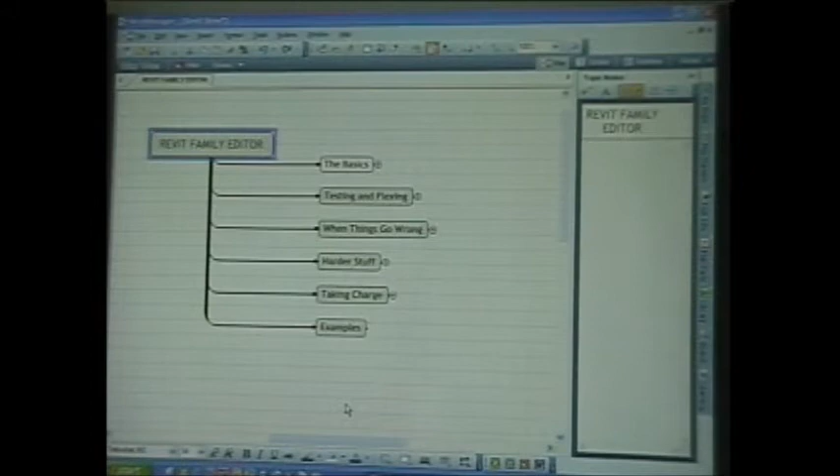So the Revit Family Editor, a bit mysterious device built inside Revit. There isn't a separate interface. When we call it the Family Editor, it's really the same thing, same application. It's just when you start building content, it ends up showing you a slightly different face. Very slightly different. Just a few different tools. Fewer tools are offered to you. So what I've done over time now is I've been breaking down things into different ideas of information, okay? So I've got this thing broken down into different portions of stuff.

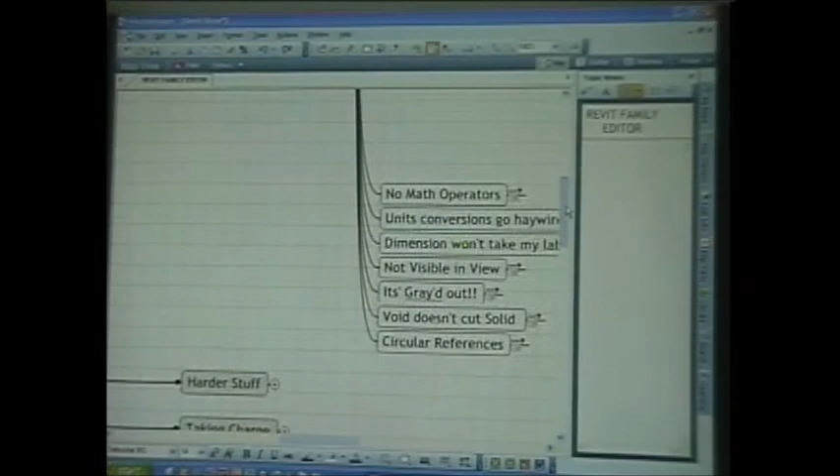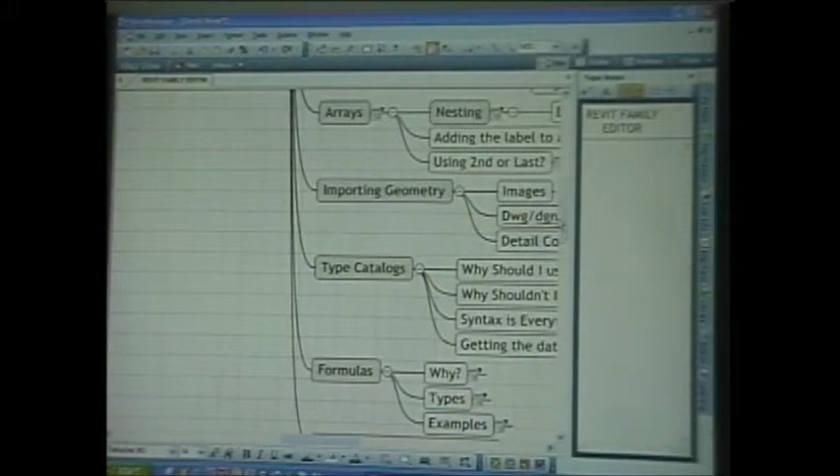So I have the basics, testing and flexing objects, when things go wrong, because eventually they do, or very often they do when you're making stuff. So different kinds of things that go wrong that we can talk about. Harder stuff, like nesting objects, rotating or angling stuff, arrays, importing geometry. There's no way we can cover all this in, what do I have, 4 hours? Yeah. You guys can stay late, that's permission.

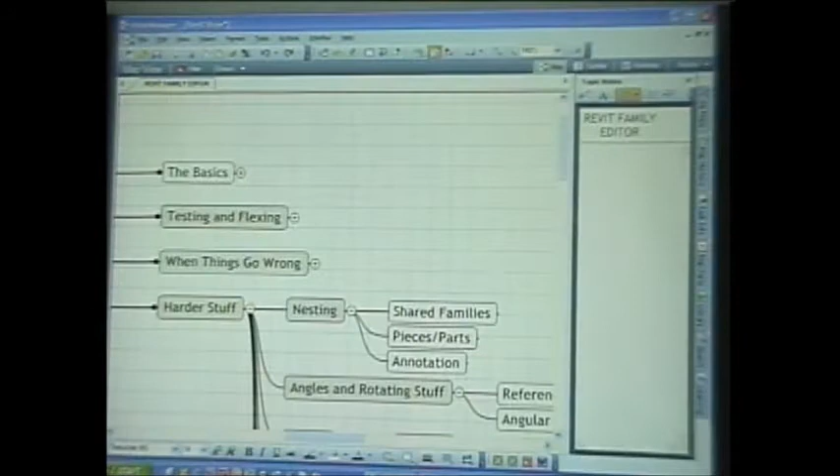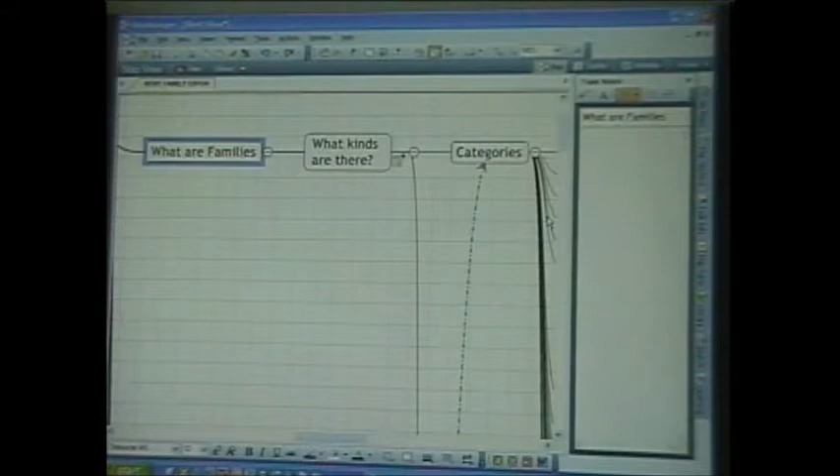And then finally taking charge, using templates, creating your own versions of templates, some other kinds of things so that you can make it a little quicker. The next time you have to build a door family, you can just start out, get going. So one of the things I like to do, now some of you have built content, some of you haven't. I don't want to be too mysterious here. So what are families? We asked that question. Doesn't even know what content is. Families in general are the building blocks of your project. So doors, windows, walls, all that kind of stuff. The kind of content that I'm talking about is the content that you build apart from the project itself. So not walls, not floors, not roofs. I'm talking about doors, windows, furniture, parametric objects.

How many of you are actually using 9.1 right now? How many are stuck in 9 or 8.1? Wait a minute. Oh, you're in 9. All right, so let's take a quick look at a piece of content. I'm going to open up an existing stock piece of content that ships with Revit. I'm using the Imperial Library because I'm American. I only learned metric a year and a half ago. So let's start off with a door. I'll grab a single flush door. It's the simplest and plainest of all doors in Revit.

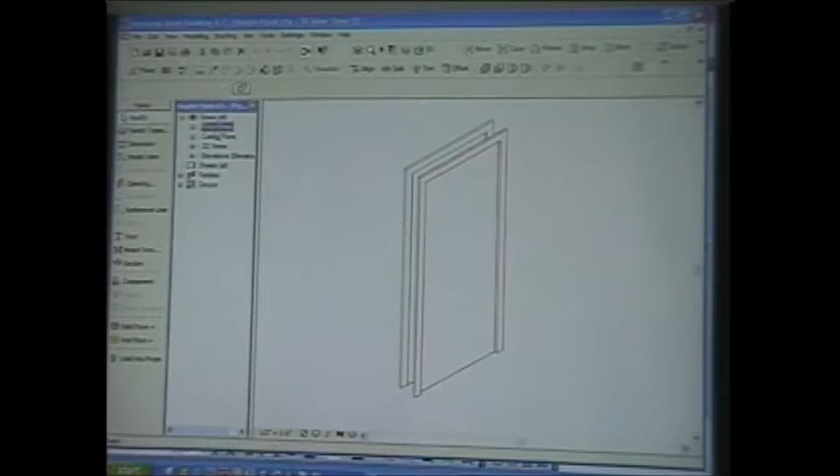So we have an object in here that represents a panel. We have an object that represents trim. Another piece of trim. We have a plan representation of the object, which involves an arc and a series of lines that represent this panel in plan. So notice while we have the line work in plan here, we have a plan representation of this panel, this 3D object. Well, it just so happens that this 3D object doesn't appear in the project environment at all, because we have additional control that says, well, I don't want to see that. So there's a great deal of depth, despite the fact that this looks like a rather simple interface. So that's a door.

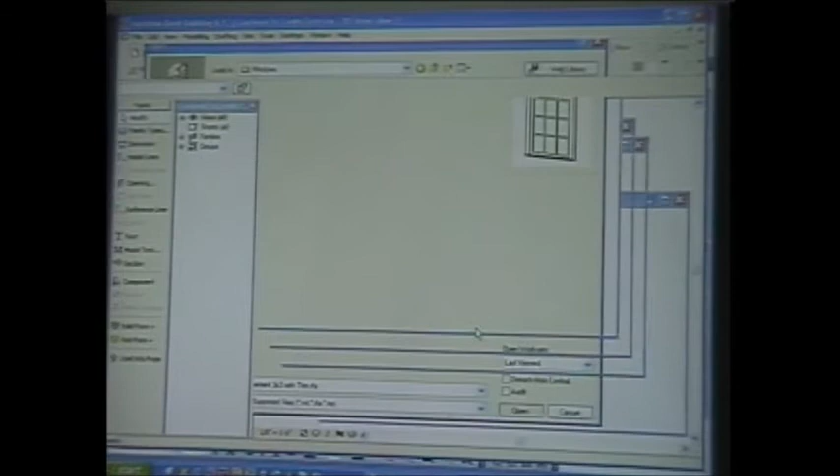Let's take a look at a window. So again, we've got different elements here. How many people model in 3D solids and so forth in AutoCAD? Doing design and so forth? Okay. Not many of you. So these are solids. So if you're familiar with AutoCAD solids, it's very similar. It's an extrusion of a shape.

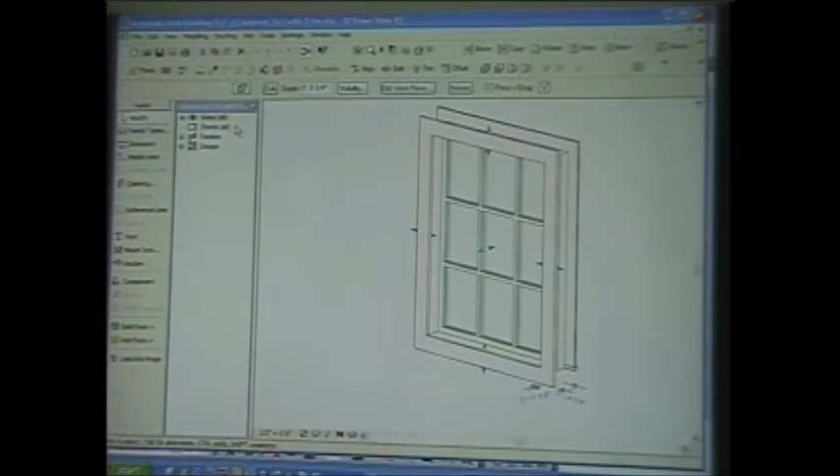So again, in plan view, we have all these confusing dimensions and parameters, width 3.0, all that kind of stuff. On the elevation, you can see the solid object here and all these reference planes and so forth.

Anybody seriously confused yet? Everybody? Except for like 4 people? Okay.

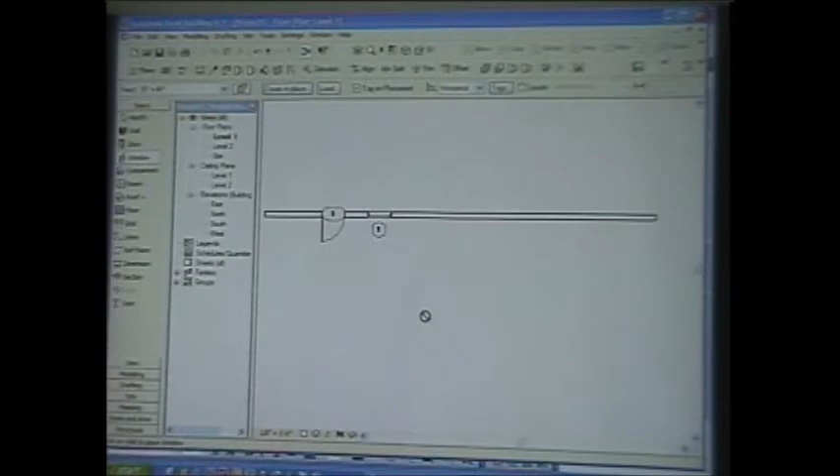So what does this stuff look like when it's in the project environment? Well, those of you who are using Revit regularly now already know, but for those of you who aren't: when you place a door in the wall or a window in the wall, you get the plan representation. You get the south elevation representation, and you get the 3D view of the object.

So what does it take to go ahead and build one of these from scratch? Those of you who are building content regularly, what's the top question on your mind tonight? What's the thing that's bugging you the most right now? Anybody can speak up. Maybe it's not important enough.

I just thought off the top of my head is how to flip, you know, the control. I just started using it. So, you know, how do you know how to flip something? What plane does it flip on? What does it use as an axis to flip the object?

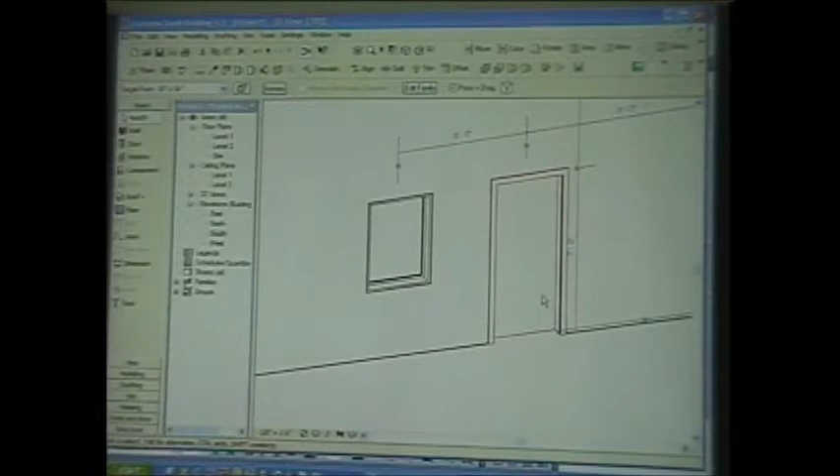Okay. So what he's asking about is this notion of being able to flip an object. Now, in this case, it's using the wall, the host itself, to flip that. And when I flip this, it's using the origin or the center line of the object. So if we take a look at this family up close, like we were a moment ago, these are what Revit calls a control. So there's a control working over here.

So that control, when you're using it, is essentially a rotation function, where when you click it, instead of mirroring the object, it rotates it around. And I think the only place I've ever found a use for that is where I have a handed piece of furniture that only comes right-handed, so a desk and a typing return. If you mirror it over, you're making something the company doesn't make. So if you need it to flip, you really need it to rotate around instead of mirroring.

So, did that just mystify anybody? Does everybody here use AutoCAD at least? Yeah. All right, so if I say mirror, I'm not talking to a blank stare. It happens. I've got 3 people in class right now that never use AutoCAD. So when I try to throw out a metaphor, well, it's like this in AutoCAD, they just, yeah.

So that's the control object that you're asking about. Does that answer your question? Well, actually, I thought that if you hit the control on the upper left, right there, it flips the door down, right? That one flips from one side of the wall back to the other side. Right. And this one flips the hand of the door, right? So it flips it about the reference plane. This one flips it based on the host.

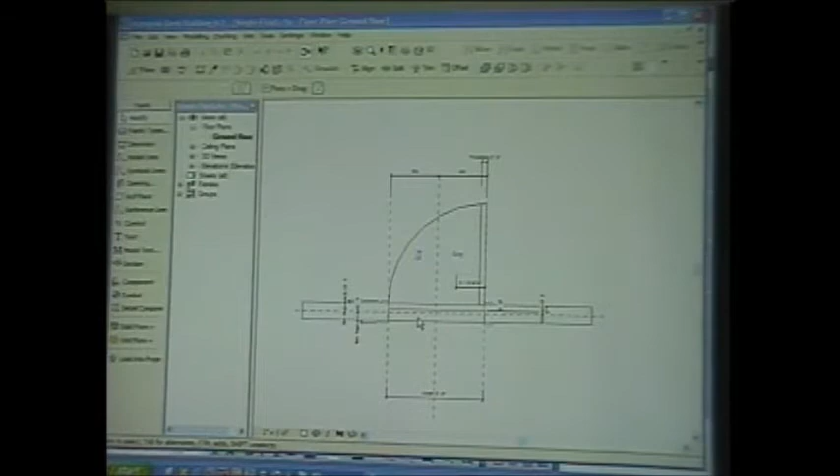Now, if the door has an inset, it's still going to flip it over based on the center line of that wall, but based on whatever inset you might have dialed into the door itself. Other question? I was just saying that was a good question. Oh, okay. Any other questions like that? And I can just knock off right out of the way?

Yeah. The green lines represent constraints, center lines. That one here obviously is a center line, but the other ones are constraints that the door is held to, the size in this case. What he's referring to here inside the family editor is something called a reference plane. And this reference plane is merely a construction line. The thing setting this apart from everything else is that it's constrained with a dimension and what Revit calls a parameter or label.

So if we look up at label here, it says width. So this dimension has had a parameter associated with it defined as width. So if I change the width of this door via family types, and I say that this thing is going to use a different width.

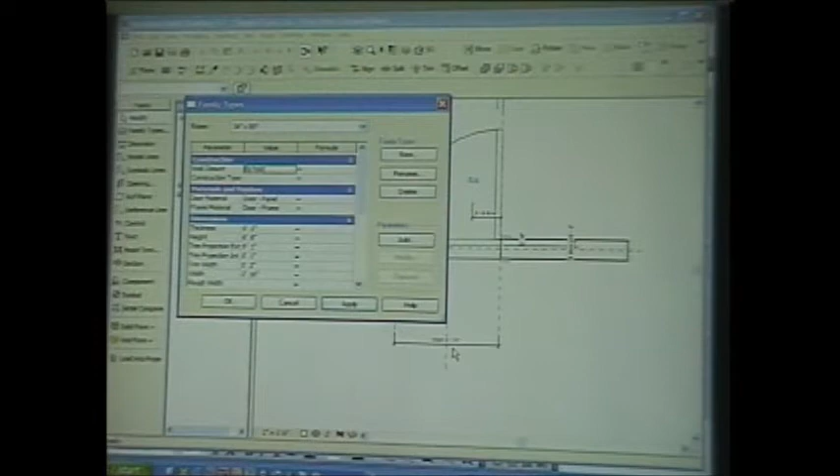Now in this case I've got some types, so I can just choose a different width. When I apply it, we'll find that it shrinks here accordingly. And the beauty of using construction lines is that this solid object can be aligned and locked to that reference plane. So just a couple of construction lines per se can lay out the rules for this door.

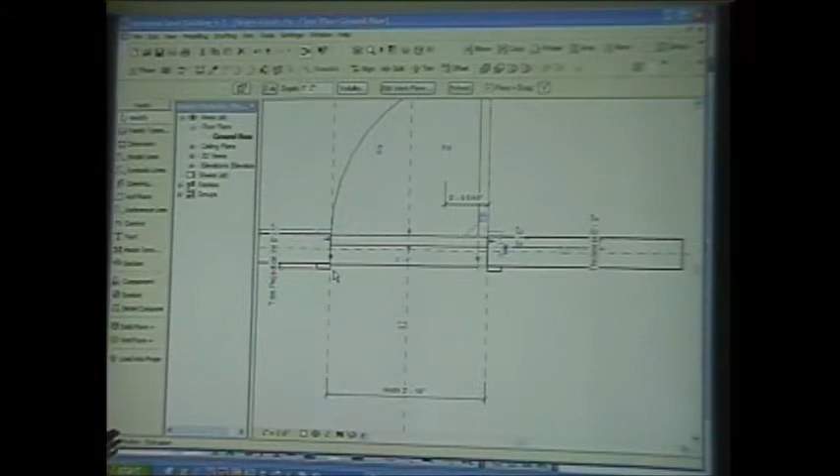And then a solid can attach to it, a line can attach to it. All this other related stuff can associate with a single object and a single parameter. So all these different sort of related things change at one time while I've only had to sketch one reference object.

I'm trying to get the parameters to act in concert. For example, I'm trying to put on window grills, or door grills, and glass door, French door, and... You're trying to do arrays? You're trying to array mullions? Yeah, basically. And so when I designed this door, this family of doors, regardless of the size, the grills will move incrementally so that they're all uniform in size. I can't seem to understand how I can make the parameters, or constraints maybe, with parameters work in concert. All right, well, I'll talk about that in a second.

Any other questions like that? I can just pick off. Yeah. I also have the same problem that he's having, but also keeping the parameters straight in the schedules. We're trying to make light fixtures, for example, just two-dimensional symbols for them. Because the Revit library only gives three-dimensional lights, which we don't really need in our office right now, just going through symbols. So we're trying to make various light symbols for light fixtures and keep them being counted in the various schedules, and we're not able to set that up.

Okay. So you're talking about trying to manage information, and you're trying to decide whether to put the information in the family or just in the project itself. Or did you know that there's a difference? We want to bring them into the project. Right. Because after we do it, load it into the project, then the project will be able to count the new symbols that we're making in the existing schedules. Okay. All right. So arrays, parameters, schedules.

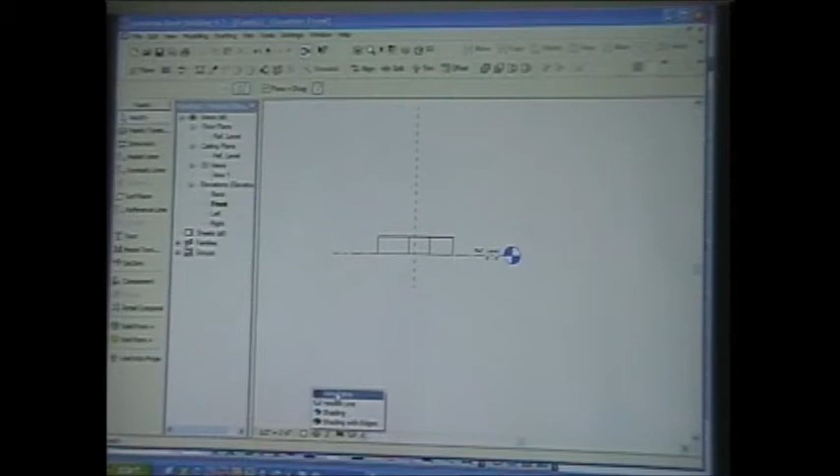How do I know that? Well, I've done this a bunch, so I'll just sketch something real quick. I'll put a block here, and I'll put another block behind it so I can't see it. And then I'll go to the front elevation. It's using wireframe, so I can see everything. So if I use hidden line, look at that. The big one's hiding the little one. So front must be down here, right? Make sense? So every template is like that.

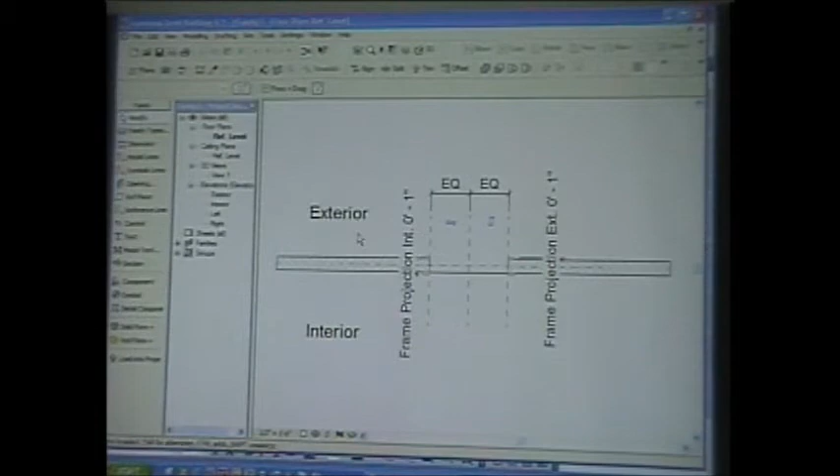However, if you start off a door family, new door, and you look at this template, a little more information: Exterior. Now how many of you think of exterior as the front when you're thinking in terms of designing a door? To be honest, I do. I always thought this was the front because this always said exterior in the door families. And one of the first families you'll build besides a title block in Revit is probably your own door. So I thought this was the front for ages.

But this is really front. So if you look at this reference plane, it says right, okay? And this one says left. And this one says center, left, right. So I go to what I think is front, exterior, and I click on this one, which should be right. Oh, wait a minute, that's left.

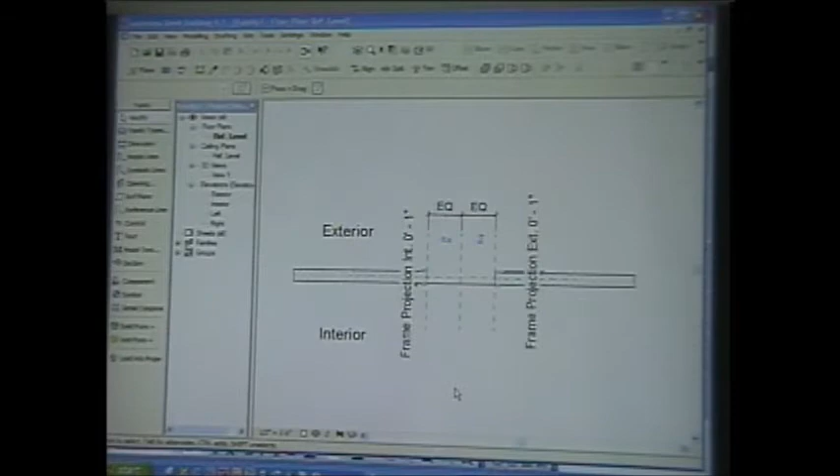So I go to interior, and I pick on the right one. Oh, that's right. So by process of elimination, this must be front, okay, based on the orientation of these guys. Now that everyone's got that straight, perfect.

Steve? Yes. I found that in some families where it says placement side and back, it tends to be reversed. And I'm speaking on Revit 9, I haven't checked it out in 9.1, so they could change that. You might be referring to profiles, because that placement side is in there for that. Oh, a wall-based. A wall-based casework might say that, yeah.

The other kind of strange thing is if you go to a 3D view, Revit always seems to be looking at the back of the wall. So I've seen instances where people model a bunch of stuff on the front of the wall and go to 3D view and it's not there. Oh my God, where's my stuff. Then they spin the view around. Oh, there it is, thank God.

So anyway, in the generic model, at the very basic, the lowest of all lowest levels, we have this reference plane here, which is called center left right. Now the fundamental practice in Revit is to lay out construction lines, add dimensions, position them where the extents of your geometry are, add dimensions and add parameters to those dimensions so that you can get the construction lines flexing the way you want, and then you add the solids or voids that you need to create the form that you're looking for, or you draw a symbolic line over the subject.

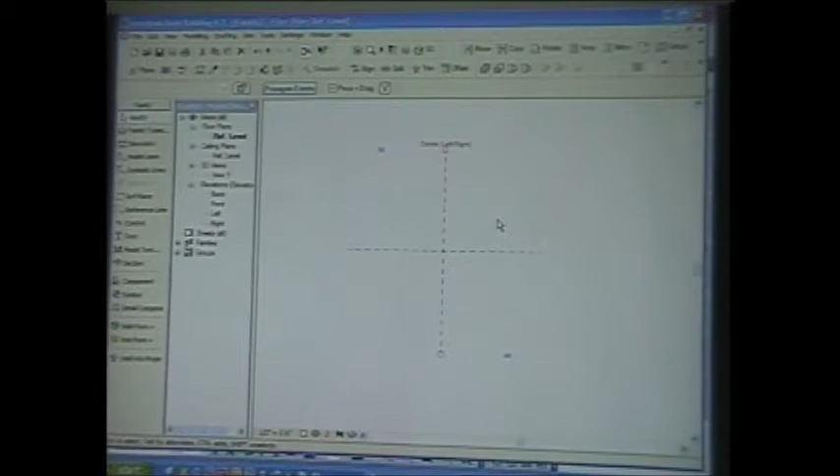So the function here is we're going to use a reference plane to define the center of our object. And that leads to another thing of consistency. If I want doors to swap out and change so that they flex from the center out equally, then I have to build that kind of decision in. And if I want them to grow from the right to the left at all times, then I have to design that in as well. So I have to be careful how I constrain things with dimensions and or locking and so forth.

So this reference plane is named. The naming function is important too, because if I've named it, then I can build objects using that reference plane, because this reference plane actually defines a work plane, or can define a work plane. To prove that, I'm going to go to a front elevation, and I'm going to draw a reference plane at a weird angle.

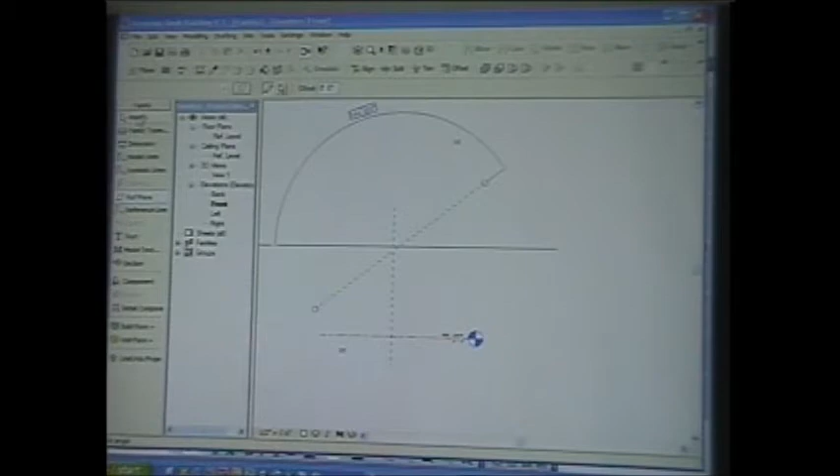And then I'm going to go to 3D, and I'm going to try to change my work plane to that reference plane. Look at that, it doesn't see it at all. Okay, so that didn't work. Go back to front, and then I pick this and go to properties instead. Keep looking up there, Mr. Ryan. Angled plane. Now that it has a nice pretty name, go back to 3D.

Change my work plane, turn on my work grid. So my work grid currently is the reference level, or that default level in the family template here. If I go in now, because I named it, notice angled plane is my option. And watch what happens to this grid. The grid has changed its orientation according to the angle of that particular reference plane. So the reference planes define work planes, or potentially they can.

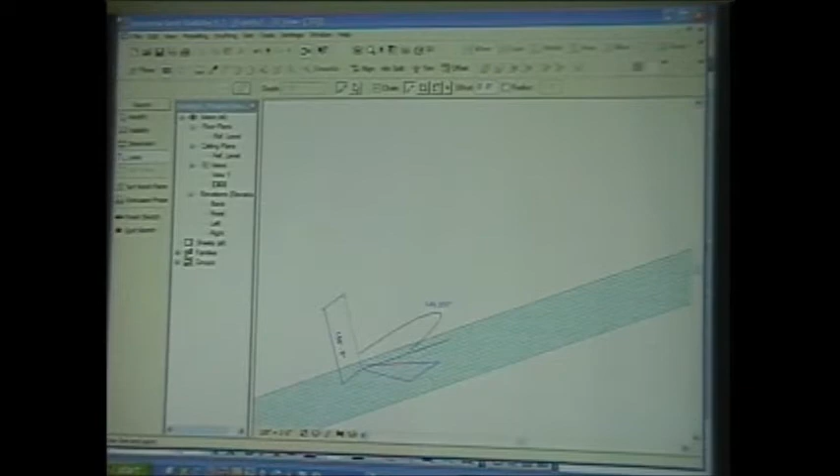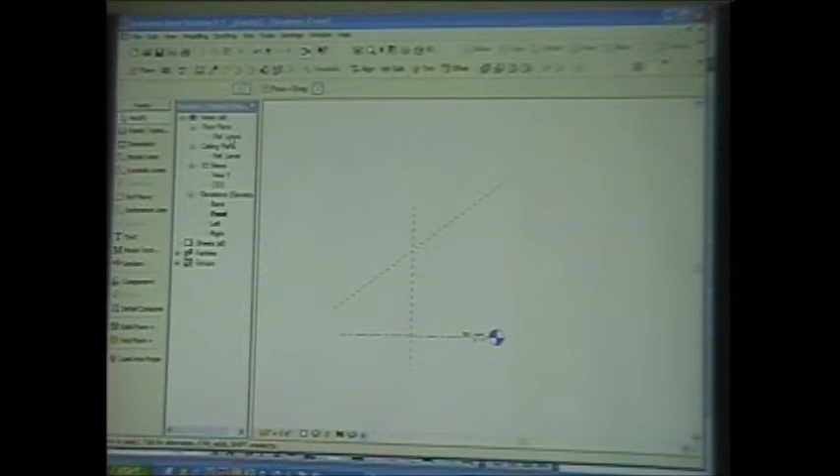So if I build an object on that work plane now, create solid extrusion, I just don't remember. So there's the object on that work plane. Go to front. Must be behind it. Miles away from reality. It's down there. Where are you? There you are. Way off in space. On that work plane, however, right? So it's restrained to that.

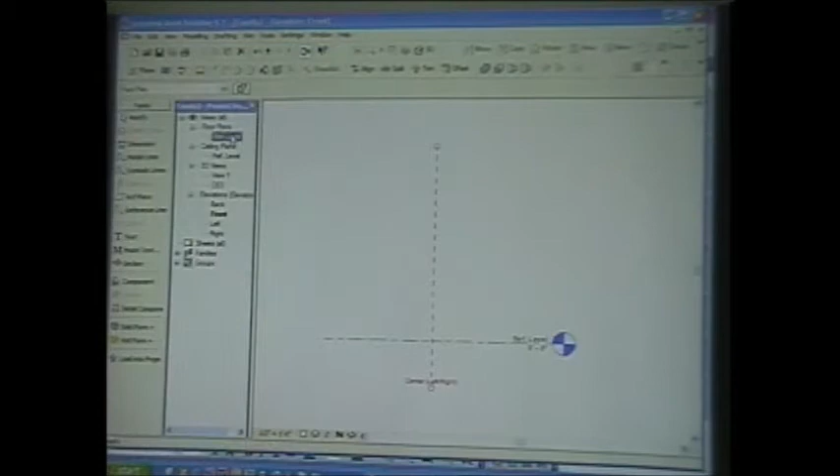So if this reference plane were to change, so too should the object that's based on it ultimately. So now it's changed its angle relative to reality as well. So work planes are very, very important. The reference planes define potential work planes for us. So if I name this one, I can build geometry on it. If I name the one in plan, center, front, back, then I can build geometry on it.

So if I'm building glass from the front elevation, and I want to sketch a plate of glass, and I want it to be on center, front, back, and I want it to be equally spaced on either side of that reference plane, I just create a sketch, tell it to be one dimension or the other relative to it. Set my work plane, center, front, back is what I've got. So I've got a big chunky piece of glass here, right, theoretically.

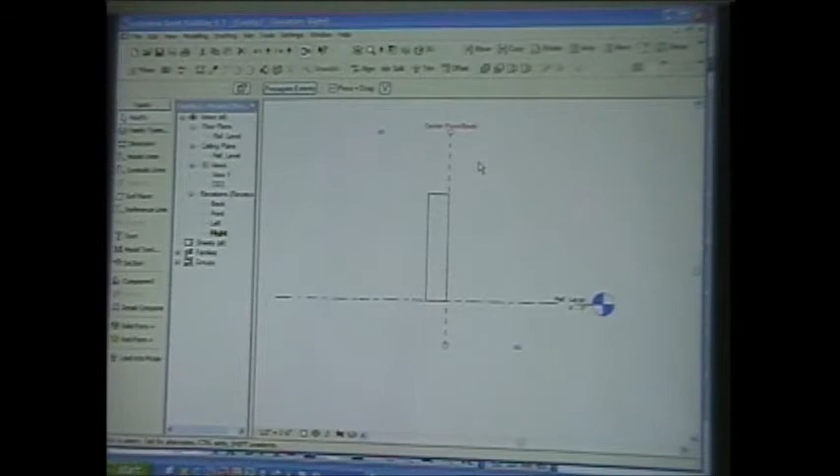So this is the work plane that it's built on, right? If this work plane moves, so does the object. So if I set up a parameter to move this reference plane back and forth, then the object will move with it accordingly, so I can get control out of the object pretty easily. Yes? These work planes also come in to help you define where dimensions go? Exactly. Yeah.

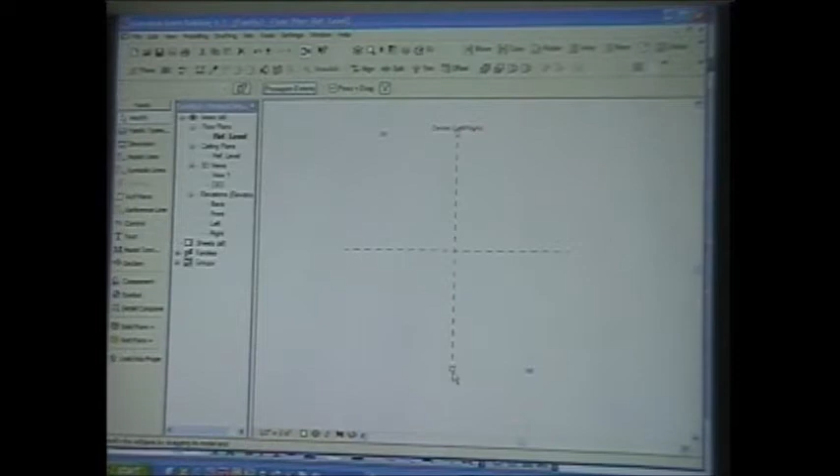So let's set up a little box here. I'm going to copy this reference plane 2 feet to the left, mirror it to the right, copy this one 2 feet, mirror it down below. Now, I haven't named any of those. Just got these guys so far, right? I'm just going to add a model line, which is, anybody know what the difference between model lines are?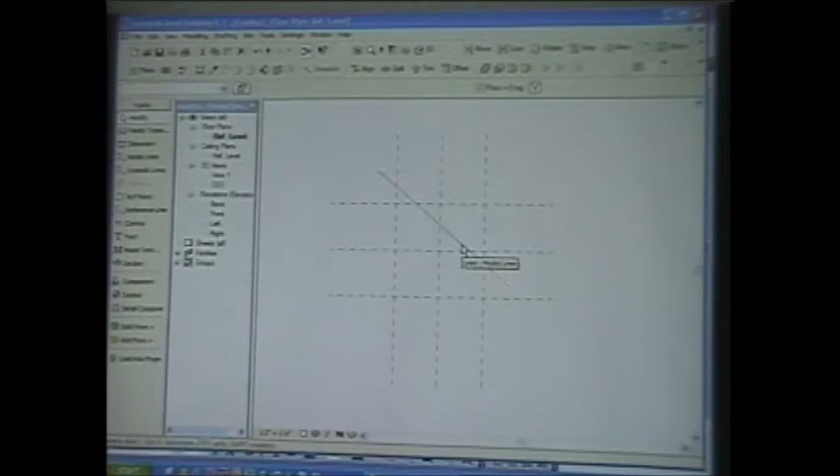No? In the project environment, you have model lines and you have detail lines. In the family editor environment, you have a model line and a symbolic line. So model lines are visible in all views. So I go to 3D, there's my line, right? If I draw the same line using symbolic lines, I go to 3D, no line. So symbolic lines are intended for view-specific applications, plan only, elevation only, side view only. Only the views that are parallel to the symbolic line that I draw is where it will be seen.

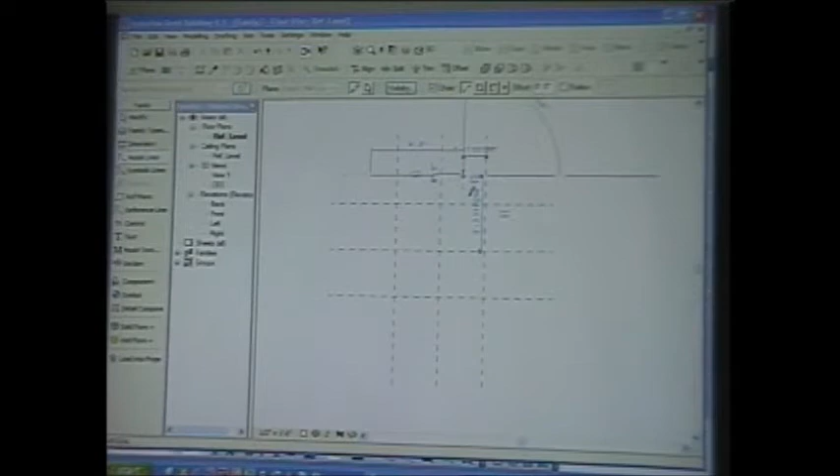So just for the sake of argument, I'm just going to draw a model line off to the left here and above. Excuse me. There's some little secret glue or magic going on inside Revit that doesn't expose itself to most people until you get into this quite a while. And it's one of the things I like to show really early on. When you draw objects and then you place them in the project, Revit just seems to know how to keep them in the same spot. They don't wander around or do anything strange.

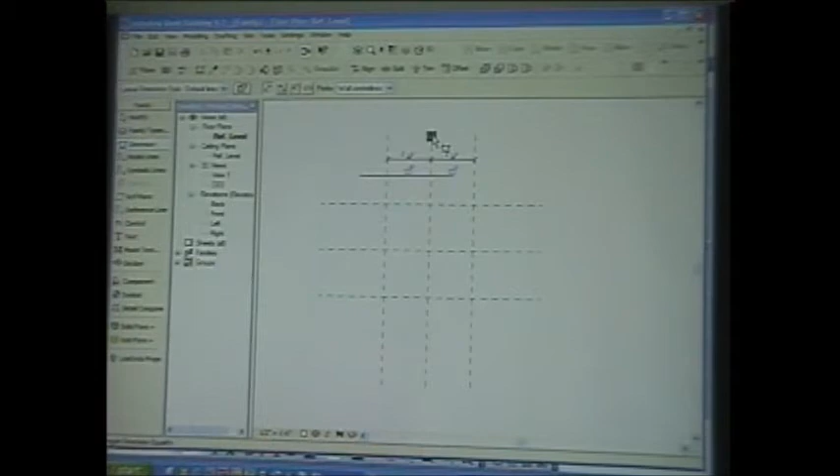And that's because there's something called automatic sketch dimensions. And it's off by default. And I turn them on, no change, nothing exciting yet. However, as soon as I start adding dimensions and constraints to my family, and I click EQ, watch what happens. You see these other dimensions suddenly appear? As soon as I got specific and said I want these reference planes to always stay equally spaced, so if I move this one apart, they should maintain that equal spacing, right?

As soon as I did that, Revit added this dimension, it added this dimension, and it added this one. And it needed to in order to keep this endpoint exactly there, this endpoint exactly there, and to keep this a certain distance from that reference plane there. So unless I add more dimensions to this family, Revit's going to maintain those for me. I can't even delete them. So I pick them and delete them, trying to get rid of them. They're there.

The reason most people don't see them is because in every view in the template, they're off. So you put this in a project, you change the equal spacing of such or other, you change its width. In the project, that line always stays put. I don't know how it manages to know how to do that. It's the automatic sketch dimension. So to take that to the next step here, I'll delete this.

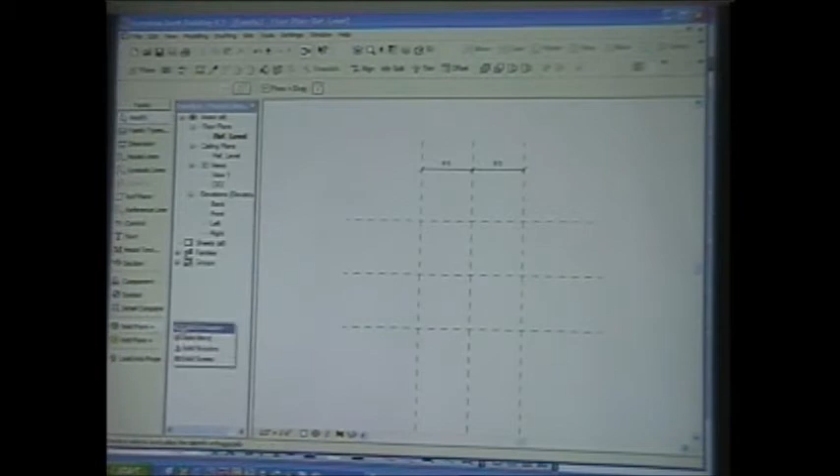I'm going to add a solid form. I'm going to park it on these reference planes. Notice these lock symbols. When you build solid objects and you have the construction lines in place, I can lock in a relationship so that if those construction lines move, so too will the solid object.

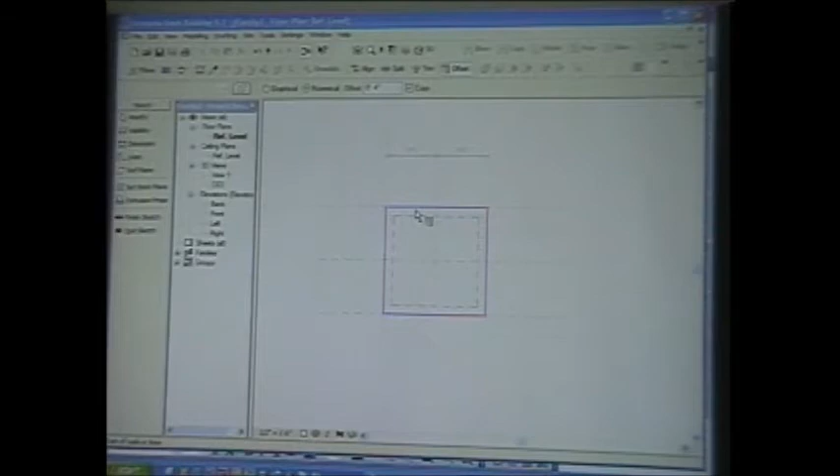Now, if I turn around and say I'd like to have it in a set of lines inside this that are 4 inches away, and I offset it 4 inches using copy here, if I click and tab, select all 4 lines in one go, and Revit pops out these automatic sketch dimensions for me. So it's going to manage the spacing or the position of that inside set of lines for me automatically. I don't even have to worry about it anymore.

If I only want those to be 4 inches away from the other line all the time, that's what it'll do. Even if this changes, and even if that changes, or if this changes. So no matter what I do to this thing to flex it, Revit's going to keep that condition in place for me. So unless I know to look for automatic sketch dimensions, I have no idea that they're there, right? Because they're off. Very, very important, because most reasons families fail is because they don't realize automatic sketch dimensions are there.

How'd you pull up that box to click it? Visibility graphics. I used a keyboard shortcut because I'm sneaky. So I used View, Visibility Graphics. And in Revit, the keyboard shortcuts that are predefined for you from the factory show up in this list on the side. So if you're looking for a command, you go into the list, you go, oh, PT is paint. TR is trim extend.

So if you get used to using the menus at first, and then you slowly get used to this, you can dial it in. Fortunately, most of the commands at least start with the first letter, and then it's sometimes the next letter. In this case, VG, and they also have the ability to program double keystrokes, so VV happens to launch the same command, but you have to dig into the keyboard shortcut file to know that. So VG launches this dialog box, and this gives me access to each of the types, the model categories, annotation categories, and imported categories if I link a DWG file.

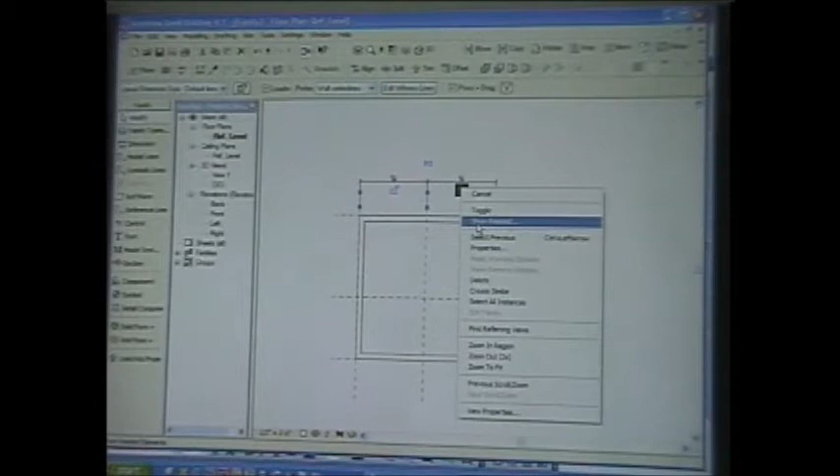Now, regarding constraints, if I lock a constraint, you have an option to choose show related, so this answers your question about showing what is constrained. If you use show related, it gives you this dialog. It can cycle through and highlight the different objects. So in the first instance, I've got the reference plane here, so it's referencing that. And then I click the other one, and it's showing the other reference plane. So it's highlighting the two objects that are bound by that constraint. If I show related for the equality statement and cycle through those, it's showing the 3 objects that are affected by that constraint.

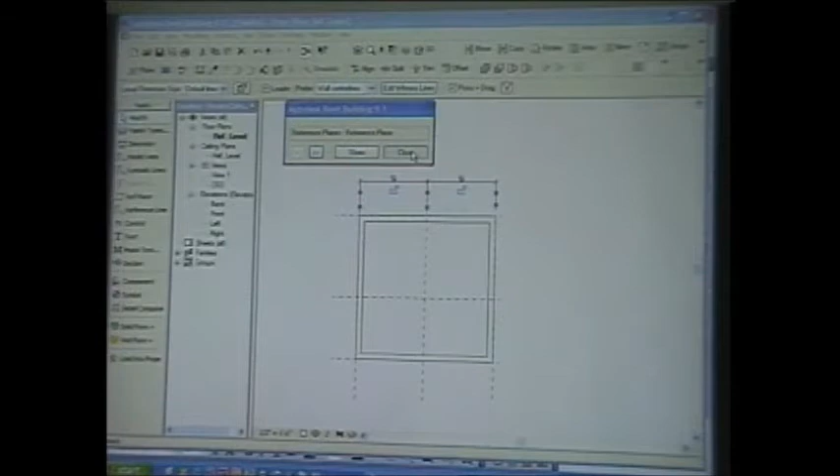All right, so if I want to add a dimension across here that says width, I can add another dimension. How does it, is there a hierarchy to the reference plane in terms of why is it when you pull one, it moves actually the center one instead in order to maintain it equal rather than moving the two random ones? I don't know the exact logic programmatically why it does that, but what I found is that if

I add a parameter to this dimension, call it width, spell it right. As soon as I do that, when I flex width, it flexes it equally. Okay, so the issue there is when you're flexing it by dragging, then it's pulling it. No, hey, Chris, you still here?

In some cases, when you have an equality constraint, you'll see that there's an anchor here. Now, the anchor can be relocated. And when you have the anchor in place. Where do you get the anchor to? I picked the reference plane. Okay, so that anchor showed up, so now I can move the anchor to another spot. When I do that, that usually forces it to behave as you're describing.

Does the anchor relate to the defined origin property of the floor plan? It's literally to the objects involved in the constraint. So in this case, we've got three objects. So I'm forcing the anchor to stay here, so it's flexing this way, as opposed to if I move the anchor back to this side, then it grows this way. Okay. And this anchor really only appears when we're dealing with the equality. You can change your family type to stay there as well, to move the anchor to that.

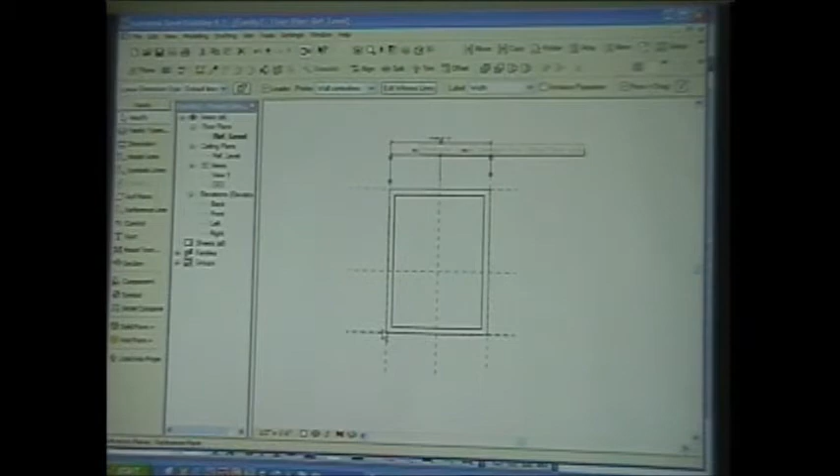Do they act similarly, the pin and the anchor? I guess you could say sort of. I mean, if you say you pin this thing instead. Again, it's one of those things where this is sort of the black magic part of Revit where you put this dimension on and suddenly it flexes the way I want it to until I pin this reference point. Okay. Now, if I don't put this dimension on it and I pin the reference plane and I stretch it, it stretches the way I expect it, right?

But if I change this and move the anchor around, then it behaves the way I'm hoping it will based on that constraint. So we've got a couple of different options: I can go the pin route, I can go the anchor route. It really comes down to what you want. The point is to make a decision, which is, fortunately, I'd say probably 90% of all content that I've ever built has been built center out.

Now, if I go back and select my solid here, and I edit this, notice those temporary sketch dimensions are still there, right? The automatic sketch dimensions, not temporary, automatic. So Revit's still managing the thickness of this guy here. So if I go in and I grab these, and to add a parameter, oh, that line is too, sorry.

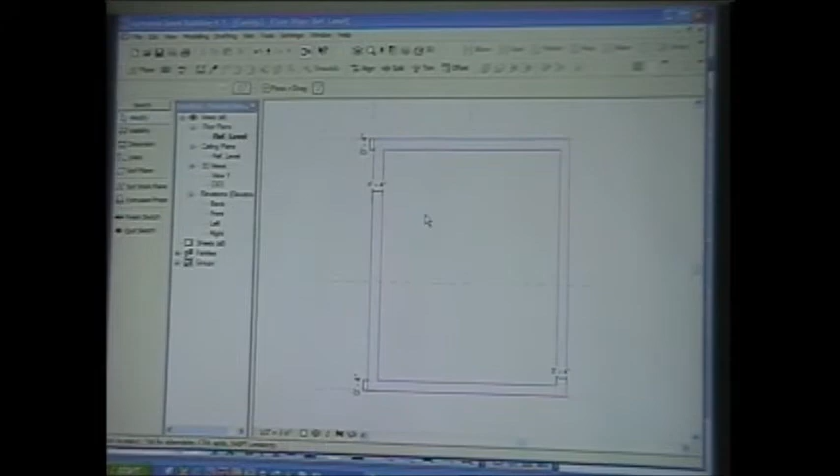So I've got all 4 dimensions selected. To associate a parameter with a dimension, the easiest route is to select a dimension in general. But these are automatic sketch dimensions, so I have no option. I actually have to turn them into real dimensions. And there's no way to make an automatic sketch dimension turn into a real one. So my only option at this point is to start sketching my own.

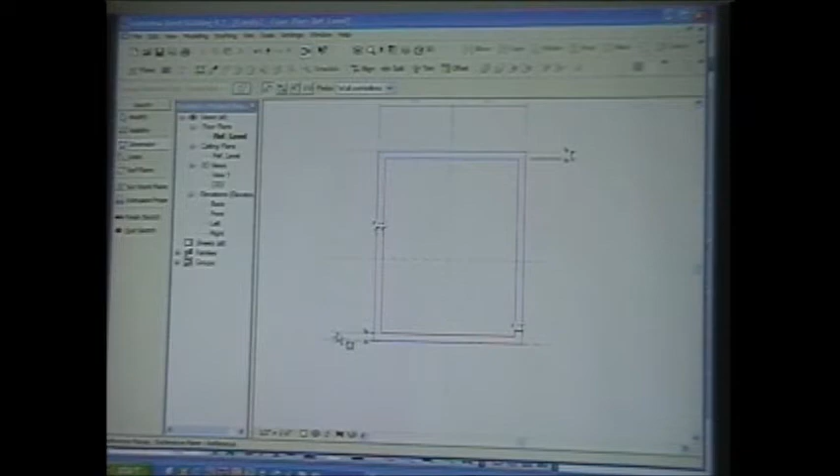So I'll go back. If I sketch my own from the reference plane to this line here, for example, notice that one went away. So I'll do it again. I go to this reference plane, to this line, and now watch this one disappear. So now I've got my own. So as I describe my own constraints, Revit gives up, gets rid of the others. So I've got my own now.

As soon as I have my own, now I'm going to have the ability to assign a parameter to them. So under Label, Add a Parameter, you can just click on the Add Parameter option, and type in frame width, whatever the name should be. Then you get into this whole debate about grouping. What should I group it under? Should it be under dimensions? Should it be under other? Should it be under identity data? Again, it's just a matter of organizing the information so it falls in the same location and it's repeatable or understandable.

So when I finish constraining that, and I go to the family types dialog, I've got a frame width dimension that's right there next to my other dimensions. So some folks will take things that are constraints, something just to govern behavior, but they don't want users interacting with it a lot. They'll move it into other, because other ends up down at the bottom of our list. So if I add another one here, see this one here? It ends up down here at the bottom. So since people never scroll, they'll never find other, right? Okay. Hide it from the user.

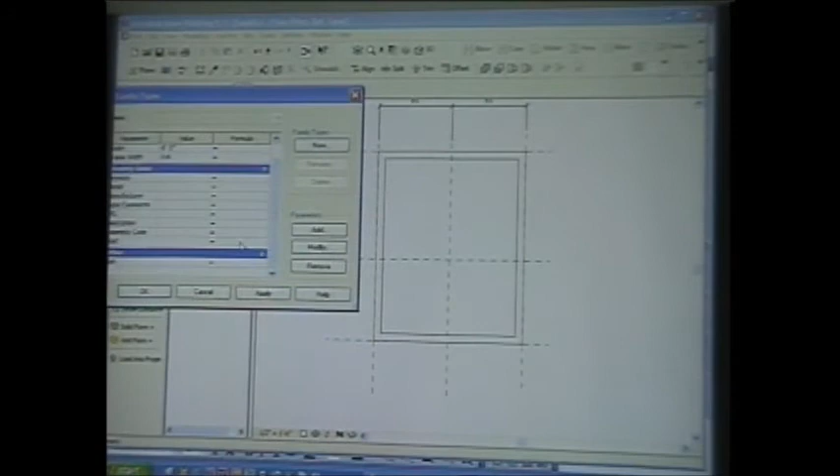Now, if I change frame width to 0.6, because I've added that constraint, I can click apply, and notice the frame is adjusted for me.

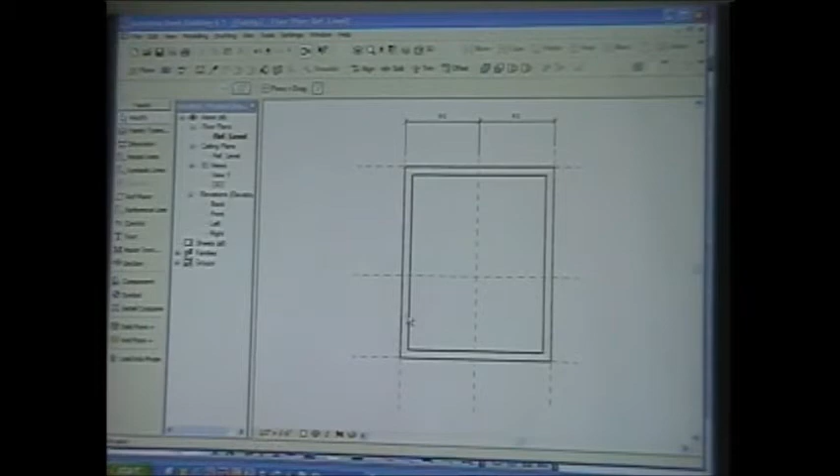Steve, is there any difference applying dimensions within the sketch versus outside of the sketch? No, the result's the same, but there's a couple schools of thought. If you're going to do constraints inside a sketch like this, it's nice because it makes what you have to look at here cleaner, a little easier to deal with. But at the same time, it sort of hides that complexity from people. So if they go in and start changing things, they don't necessarily realize that you have some constraints lurking in there. So you can have a very complex family when you only see a couple parameters. But why is there 15 other parameters? What do they do? So you have to start digging to find your way in.

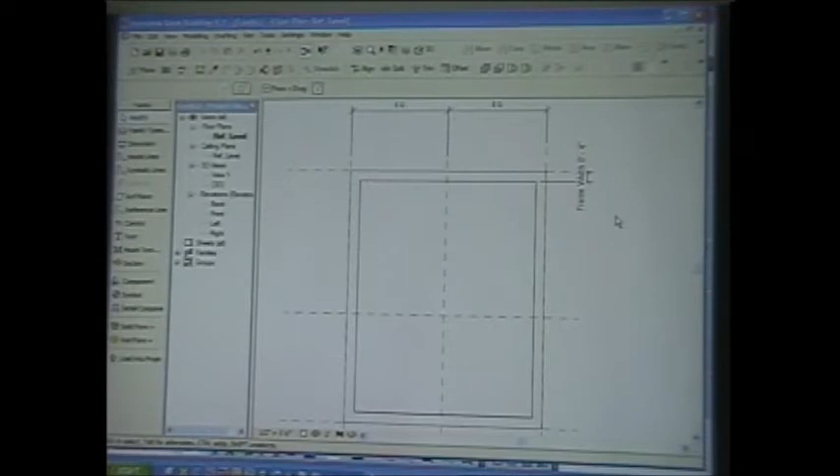The fundamental thing I do is if I put constraints like this in, I do them all in the sketch for this thing. I don't mix and match. I don't do half of them in here and then finish my sketch and then put the other half outside. Okay? So just be consistent. And you can also over-constrain things by trying to do that. So if I go in and say, put this on here, it lets me do it. But if I try to give it a different constraint, Revit's saying dimension over-constrains the family because, well, I didn't realize that there's one lurking inside the sketch of that object.

Is everybody comfortable with this notion of sketching objects in general? That takes some getting used to as well. Okay, you build a lot of objects in Revit in sketch mode. You build stairs, railings, floors, roofs, ceilings, in-place families. Sketch mode, big with Revit. You build something simple, Revit builds the thing that's hard. So whenever you're building a solid object, you've only got 4 kinds of solids you can make. An extrusion, a blend, a revolve, and a sweep. But they all are based on a sketch.

Does everybody know the difference between an extrusion and a blend? Well, for those who don't, an extrusion is a single profile that has a certain depth. Whatever the shape is, however deep you tell it to be. A blend is exactly the same except it uses 2 profiles. It creates a shape based on this sketch and a shape based on this sketch, and works out the geometry between the 2. A revolve is a sketch of a profile spun around an axis. Think of a wine glass. And the last is a sweep, which is another sketch of a profile that follows a path. Now, how many people use Viz or Max? Familiar with the loft tool? We still don't have a loft in Revit.

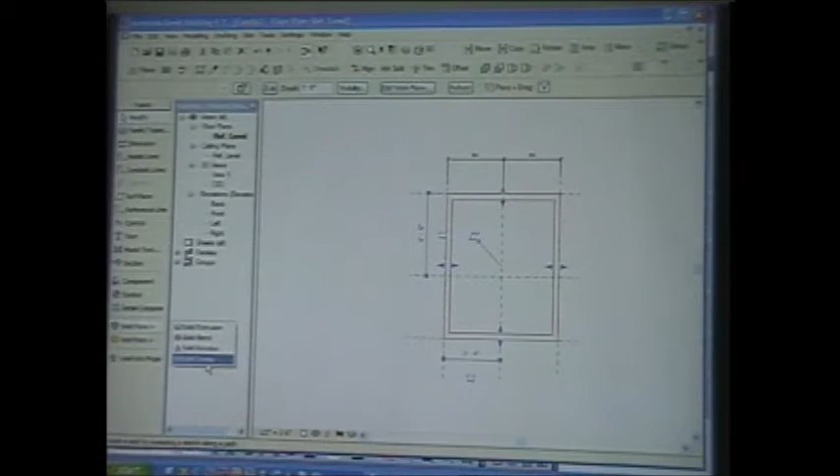Steve, I have one question on the constraints. You're talking about putting the labels inside the sketch versus outside the sketch. Let's say I wanted to change the actual thickness of that frame, this way. Could I do that? Yeah, you can't do it in a sketch. I couldn't do it inside the sketch. Well, I have to do it outside. You have to constrain its depth.

So if I go to right, this view here, I can't really constrain this inside the sketch, can I? I can, however, constrain it in here. So extrusion end and extrusion start. Every one of these extrusions has these parameters. And there's this little gray, if it's a snake it'd bite you, kind of button looking here. If I click on that, I can associate it with a parameter, call it depth. And then notice it has an equal sign now, and it's not giving me a chance to punch something in here.

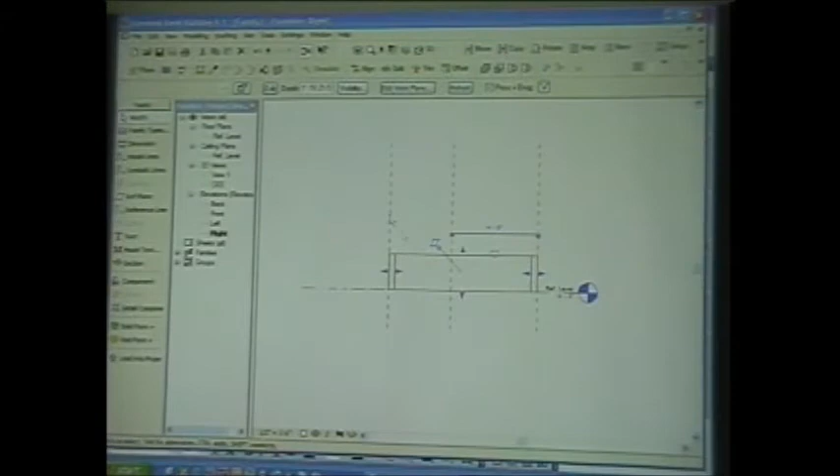So now I can go back, family types. Where did I put it? Under other? Yeah, see, there it is. So 2, apply, and see how it increased slightly? Apply. Now, one of the tricks that you can make, if you don't want people to mess with this in the project environment, is to put your value right in here in the formula. Make it 5 feet, so then I load it into the project.

Switch back to family, use my handy dandy load into project button. And I place my cool generic component. And I go to 3D. There's my cool box. I go into properties, type parameters, and I can't change depth. Okay? So I've created this little hurdle that somebody has to get over in order to be able to modify that thing. So if depth is something I don't really want to change, just put it in the formula side of the equation there, and now it's not available for me. Whereas frame width is something I can readily change if I need to, right here in the project side.

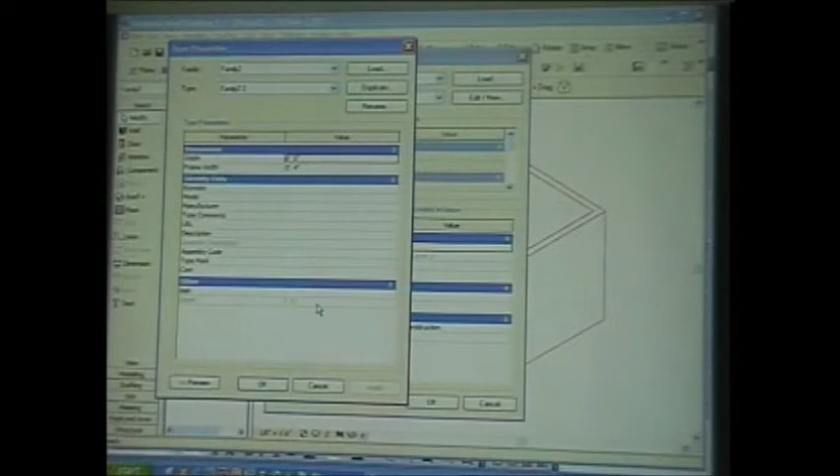When you change that, right? No, I can't. It's blocked out. See, I can't touch it. Even if I make 10 different types, I can't touch it. The only way to get back and touch that thing is to edit the family itself, and then go back into family types and say, you know what? I made a mistake. And then load it back into my project. Leaving it blank will make it editable inside the project? Yeah, if I put it in the formula side, then it's hard coded essentially. If I put it in the regular side, over here under value.

Now, one thing I can do, if I delete this value, Revit will just stick that value into the other one. So a tip and trick, if I've got 5 types in this thing, and I want to get the same value into 5 types really quick, put it in the formula side first. Just apply the value, and it'll apply that value to each of the types, and then delete it, and it'll stick it in the other side. What am I talking about? I'm talking gibberish here, right?

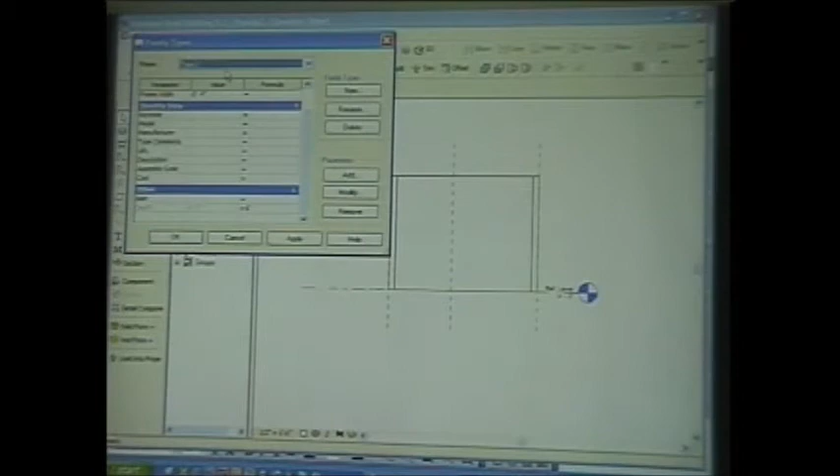So family types, I'll create a couple new types. So now this family has 3 sizes potentially. Type 1 has a 6-foot width and a 4-inch frame and a 6-foot depth, right? If I want them all to be 6 foot, I add it to this side, click apply, and then if I check this, they're all 6 foot. So I go to each of these types. Now, if I go back to type 1 and delete this, they've all got a 6-foot value, but now I can make 3, 4, and 2 can be 8 or 9.

Then when I load it in the project, I've got 3 types now. So I've got 1, 2, 3. So I change this to a 1, copy this over here, copy this over here, change this one to 3, change this to 2. So one family, multiple configurations, all based on the types.

Now Revit has a kind of object that uses something called a type catalog, which takes that functionality out to another whole level of use. Structural I-beams are a good example of that. Steel.

If I click on W flange, if I don't double click on it, I just click it to select it and wait patiently, it populates this list down here of all of the sizes that happen to come out of essentially the AISC manual. So if I wanted a 6 by 12, and a W8 by 24, and a 16 by 31, et cetera, I just select them from the list. So I don't have to manage.

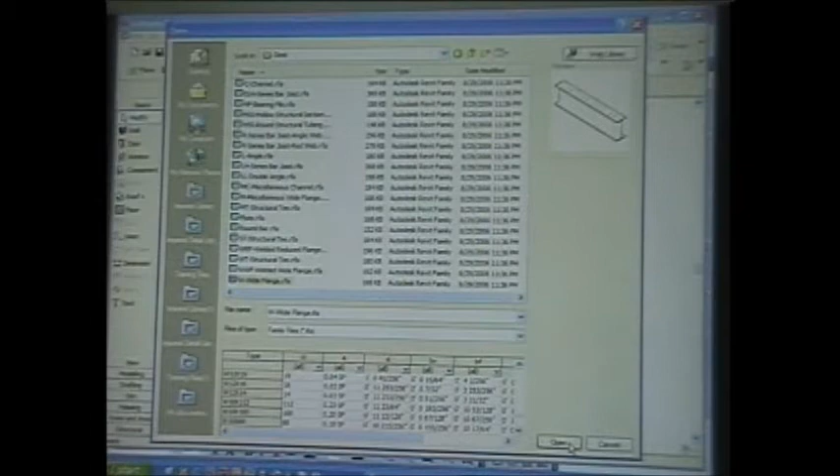Imagine managing in this family, in this dialog, managing that list. It'd get pretty long. And I guarantee you'd forget to change one of the parameters in this dialog box. So the type catalog makes it easy because all it is is a TXT file with columns of data separated by commas.

Steve, can the steel table be trusted? Absolutely, implicitly. Is there a disclaimer buried somewhere that if you use this and it's not right? Well, it did come with the software, so it has to be trusted. Right? And I read it on the internet.

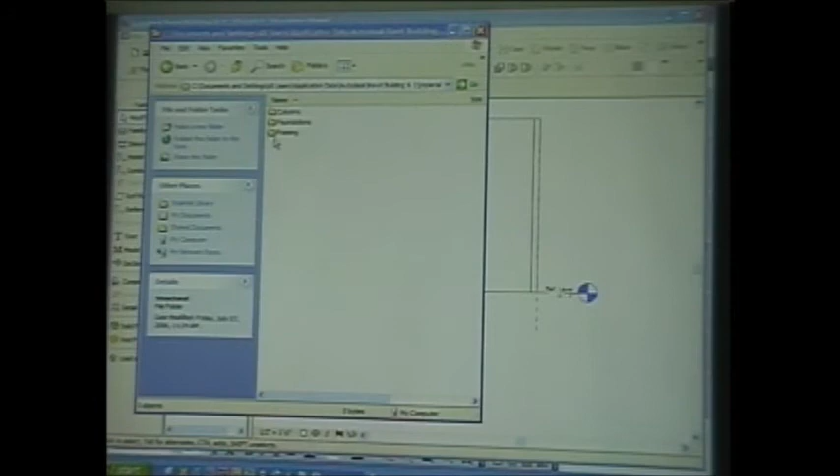So I'm going to go to the content. Let's see. Where is that stuff? I always forget. Documents and settings. It's nested a little deep. Application data, Autodesk, Revit Building 9, Imperial Library, structural, framing, steel. Okay, see this little TXT file sitting next door? The trick to making these guys work: make sure it has the exact same name as the family that it supports, but it's .txt instead of .rfa.

So if I open the TXT file, that's what it looks like. So unless Steve Campbell entered the wrong number in here, possible, I suppose, right? This is absolutely to be trusted. Slight cynicism or skepticism, perhaps, but the goal is that it would be trustworthy.

The format of that is just throwing values into each parameter element. Yeah, in the help documentation under type catalogs, there is an explanation of how you use it. And the structure is pretty simple. You have the parameter name, which is W in this case, the kind of parameter data type it is, and then any other information. So A for area and inches, and D for length and inches.

So you set up each of the parameters across the top, and then you supply the data for each of those values. And then it populates that list. And if there's an error, Revit tells you. You try to open that, it tells you there's an error. So start slow. 1 row, 2 rows of data. And then once you're comfortable, expand on that.

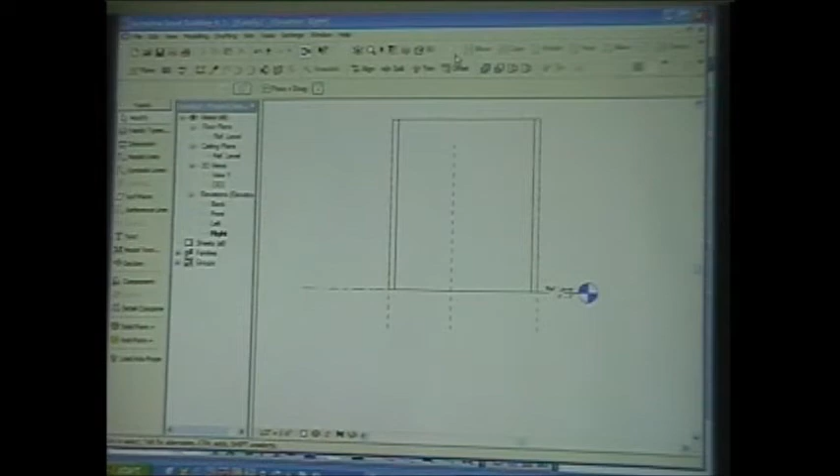When you get your 3 types now, can you get Revit to export the TXT file, or do you have to make it yourself? Yeah, you have to make it. There's no quick and easy export your types. There is a little free app that, oh, Guy made it. We'll put a link to it on our DVD or something. It's basically a little Python script that takes an Excel file and creates a Revit-based TXT file for your family. We used to do that with window types and things like that.

Are you all familiar with AUGI? James mentioned it earlier, but are you members of AUGI? If you do a search there for Guy Robinson, who's in New Zealand or is he Australia? He's been working on a bunch of programming items for Revit. And one of the things he wrote was a Python script to automate the process: you can store all that data in an Excel row and column setup, and then run that to write it to a TXT file. So if you end up doing a bunch of this, it's worthwhile taking a few minutes to get familiar with that.

Does this accept anything like C# or VB or AutoCAD? Revit's API can. I know that some people are writing stuff for the API in C#, and C++ is the native language for Revit. In terms of content creation, it's starting to get more robust where you can build objects using the API. But I gave up programming in VB in 2000.

There are a number of API classes planned for AU. Yeah, Danny's doing one. Somebody else doing another one? I think there's about 4 or 5. Are you going to AU? No. Not yet, right? Okay. All right, how much time we got?

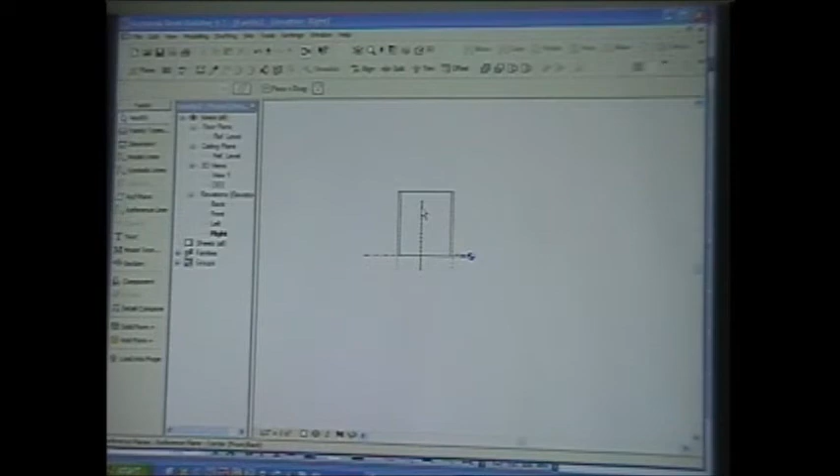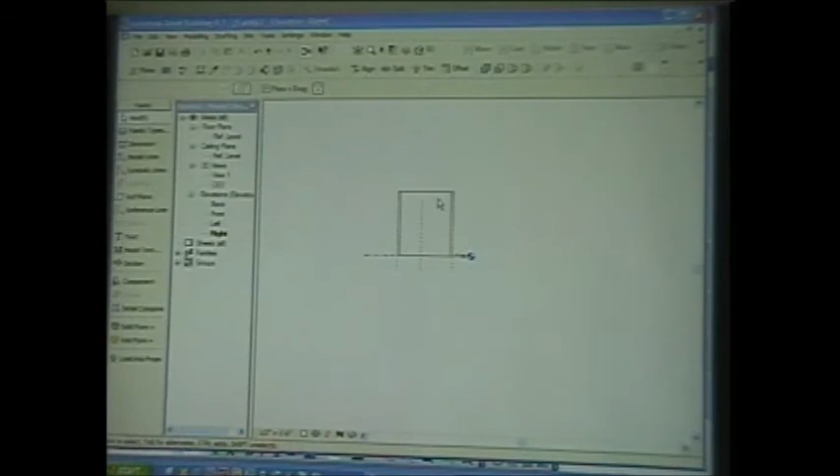Is there a way when you make a dimension, on one hand you can make them equal, can you make formulas on the dimension? Well, in the family environment, you can set up formulas where, let's say my width value, if I want to say that my depth should be the width times 2, or the width divided by 3, or something, it's just a matter of using the parameter, right?

So width, it's case sensitive, so you got to make sure it's typed exactly the same as the other. So one of the things in my little mind manager thing is, things not to do with your parameter names: don't use minus and plus. Because if you use minus and plus in your parameter name, then you try to use that in a math equation, Revit's going to try to do math on itself. It's going to say it can't do it, basically not going to be able to solve the formula until you realize, oh, I'm using width dash something. So it's trying to do math on its own name.

So if I say width divided by 3, it's coming up with 2 foot, right? So if I switch to the other type, the width hasn't changed, right? So I'll make this something else. So now I've got 1. Another example would be, let's say you're trying to find out the pitch or the slope of something.

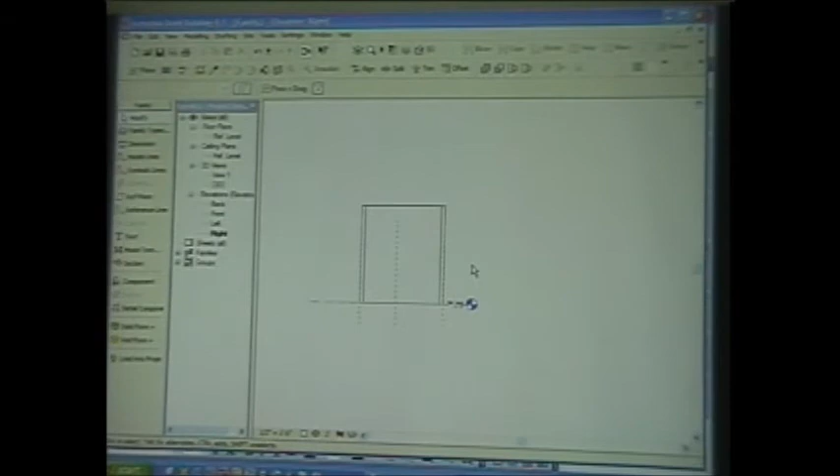Oh, nothing's there. In fact, when you try to place an object that has no representation in plan, normally Revit will give you an error message and say, hey, I can't see anything when you place them. They're really there, but there's just nothing visible. So a good example of that would be, let's say you have this sort of base and it's really ornate. You've got a whole bunch of steps. And all you'd really like to see is the outside edge of it. It's 4 feet at the base, but it steps back a whole bunch. And if you put it in an eighth-scale plan at its normal resolution of showing all those lines, you have this big, gigantic black line, big blob.

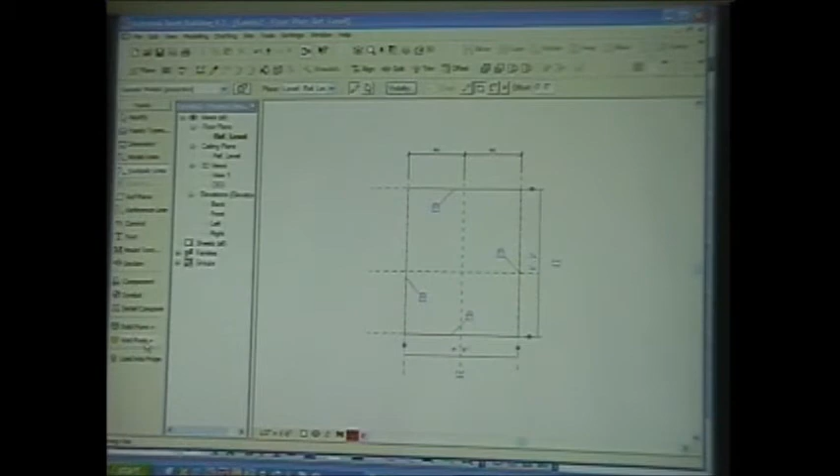Well, if you tell Revit not to show this complex thing in plan, and then you just sketch symbolic line work. Now, I'm going to hide this using temporary hide isolate, those sunglasses down here, hide object. Then I go to my symbolic line work, and I go to generic models, projection, and then I sketch these lines on top of this, and lock them in so that they'll move with the line work, and then load this into the project. Now I've got just simple squares, right? And I don't see the extra lines that might be there. So that takes something that's pretty complex and is way too much information in the eighth-scale plan. It makes it a little easier to manage, right?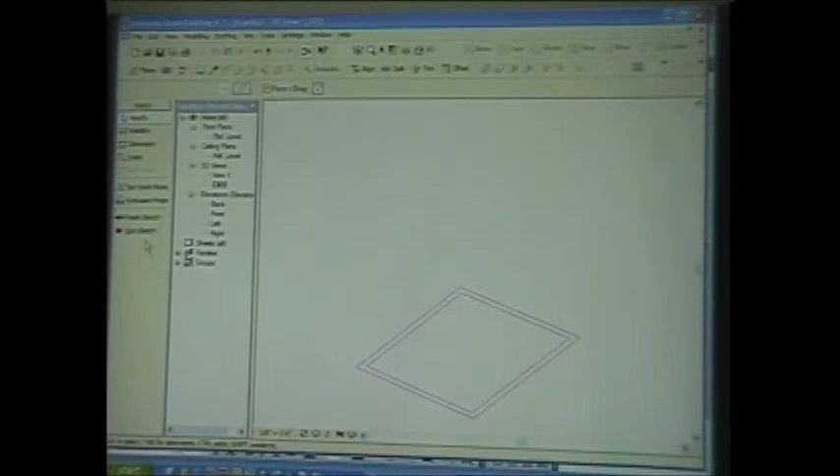Now, if I go back to the family, in addition to being able to control the visibility of these things with regard to their plan or view orientation, you can also specify whether or not it's visible at coarse or medium or fine. So it's kind of in combination or in concert with that. You can say, this thing's too complex for coarse, but if I get into a view where I'm using fine, well, now it's okay. So let me show it there.

So I could say, show it in plan, but don't show it in coarse or medium. And then in the line work in plan, I could say, you know what, we'll show it in coarse, but we won't bother to show it in fine. So it doesn't compete with each other, right? So then I load it in the project.

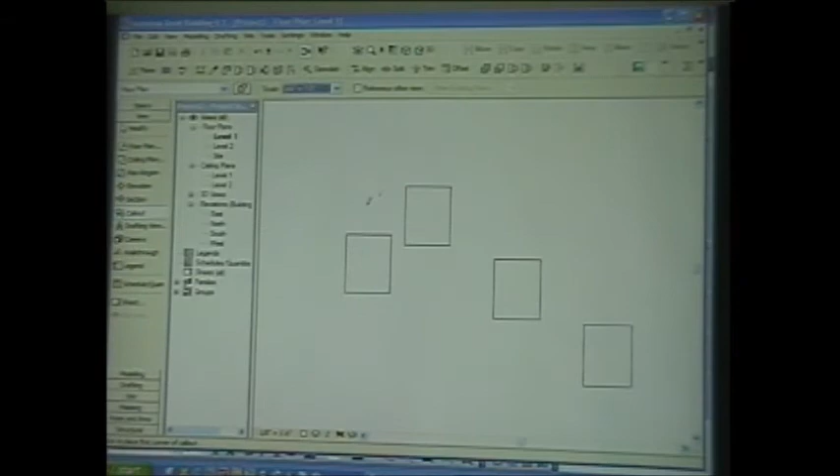So now my view is at 8th scale. So I'll make a callout that's using something larger, 3/4. Go to that view and switch to fine. Now I've got more detail.

Okay? Good example of using this sort of thing: if you download the UK doors that are on the web, they've got hardware in there, what they call ironmongery. If you use those doors, they've got some of that stuff set up to only show up in fine. So if you end up doing an enlarged elevation of the door assembly, you change to fine, and suddenly the door closer and the hardware shows up on the door.

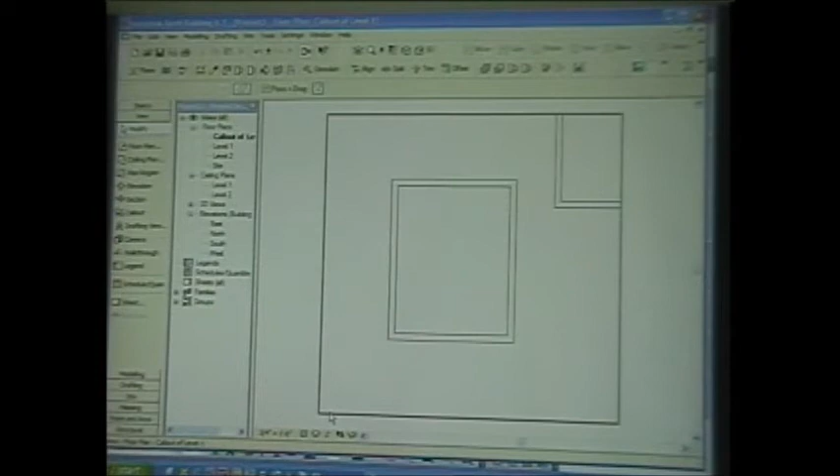If you go back to the family. When you have an object that's well above the cut plane, so most plan views in Revit, the cut plane's 4 feet above the floor. I can't see this when I load it in the project because it's technically above the plane. If I sketch a model line, I make it visible from the base elevation here up so that it at least goes through the cut plane.

And then I can constrain those points to the top so that if the thing moves up or down. Revit, if this invisible line is cut, then Revit can show the objects that are related to that. So if I draw some symbolic line work in plan, then that symbolic line work will show up. A good example of that is to take a look at the casework, wall-based casework that Revit has. We've done that, but not with good success. I mean, sometimes certain objects don't represent.

We've done it with some clerestory windows, where the window is split up. Well, windows are a different animal because the cut plane in the family also affects how it's represented in the project. So windows are a special animal when it comes to cut plane. And that's why they created the plan region tool.

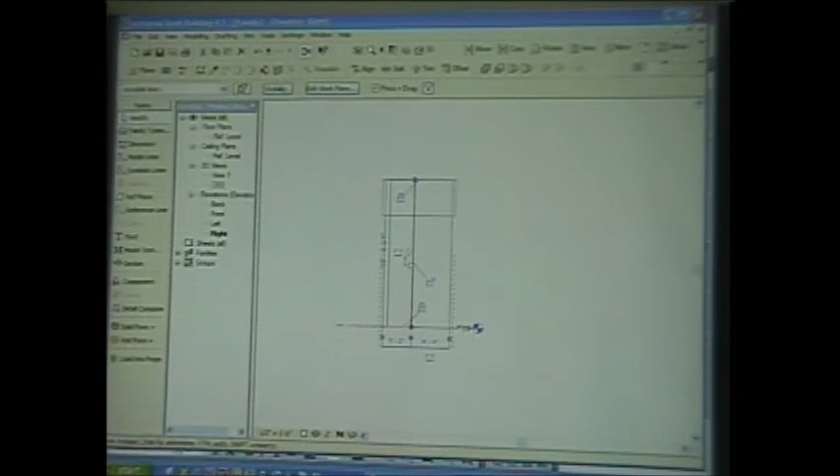So if you have a window that's above your level, you can use a plan region to have it show up. So you can build the window normally, as if it's right here, move it up in height, and then use a plan region to have it show up properly. So that's essentially outside of the family editor itself, it's just in the project environment. Talked about showing constraints, visibility of objects. The only one we haven't touched on a little bit was this notion of labeling, or labels in objects.

I hope it's in here. Washer dryer. Help me, Chris, remember where it is? Thanks. Washer dryer. Now, I don't know if they've taken the concept out of this thing, but I go to plan. Not still there.

Text by itself will never show up inside the Revit family. It's just built that way. It's not going to show up. So if I want a piece of text to show up in the Revit family, so if I put it in plan, it's going to show up, I have to use a label. And actually, I have to nest the label. So this object is actually a family, another family.

So if I go to File, Load from Library, go to Family, Annotation, I'm looking for a label family of a predefined size. I can create more sizes and stuff. So what they did is they loaded a label annotation object into this family, and then they hooked up a parameter called label. Okay, so when this thing's loaded into the project, all I have to do is change the label value in the object. And there's also visibility control.

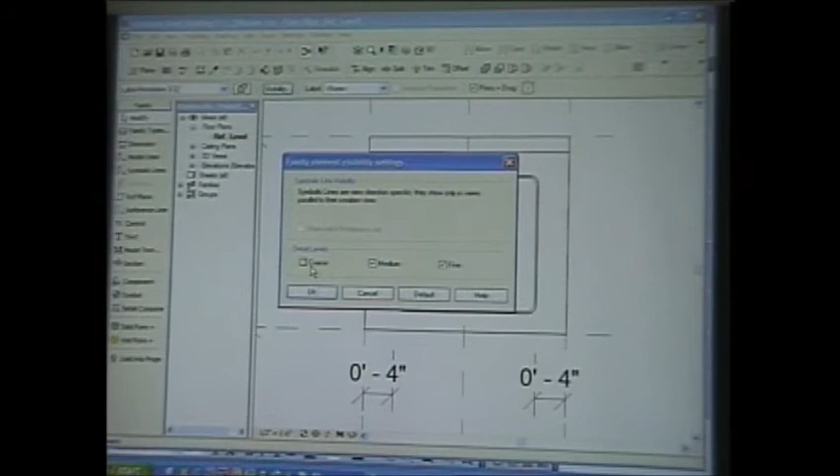So if I select it, I go to visibility. Right now, this thing does not show up at coarse. So if you've been having some trouble with it, you might find that if you go to look at the object, or when you created it, if it was set up to show up only in a certain condition like fine or medium, then you'd have to change your plan or the view to show that proper level of detail.

So if I go to, say, component, washer, so in this view it's not there, right? So if I put one in here, there's the W. Now, in my view, it's a fairly serious limitation to this concept because that's 3/32 text, and it only really looks right at a certain scale. Well, maybe the 8th scale looks great, but a quarter or half-inch doesn't.

It moves around. And one of the things I did was I had a projection screen symbol that mounted on a wall. And I had a PS projection screen, and at 8th scale it was good. But I switched to an enlarged plan at quarter, and that thing started working its way farther away from the screen every time. So I ended up having to set up a situation where I could set up different rules. I had these parameters for 8th scale, quarter scale, and I would just toggle on the visibility of the thing. So it started to turn into real work.

So I said, you know what, that stinks. I'm just going to use a tag. So the Revit tagging functions, annotation tag, if you want to report a certain value, just set the tag up so that it's using that parameter instead of mark or type mark.

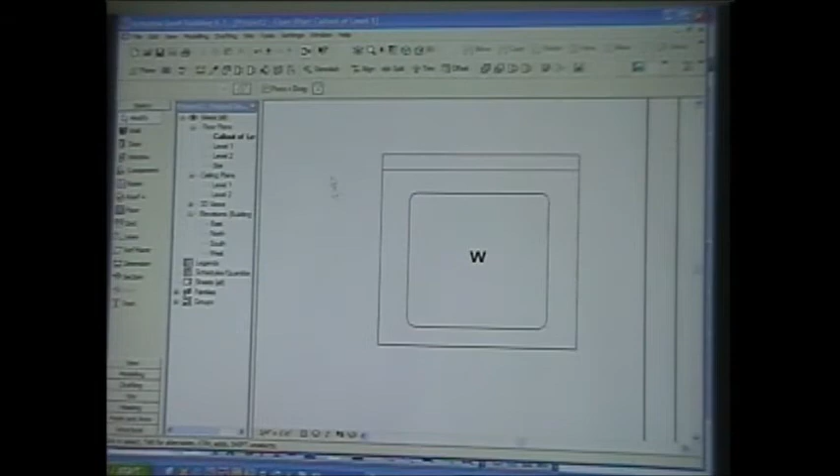All right, it's 4 o'clock, 4:11. 4:11, so that means it's really 7:11 here, right? All right, more questions? I can stay here as long as you want to stay, but you don't have to stay just because of me. Yeah. Oh, yeah. All right, so information. He's about to walk away, and I'm going to talk about information.

So Revit out of the box, objects have at least this collection of data for identity. Cost, assembly code, description. Whether you fill it out or not is completely up to you. But if you use the assembly code value, Revit's going to go out to a table and try to find a UniFormat classification for that object. So this was some generic object. So I'm going to say it's something related to services, it's an HVAC device, et cetera. I pick that, it's a chilled water system. It fills that value in. Then when I do scheduling later, I can choose to show both the assembly code and the description.

And if you're familiar with eSpec, anybody heard of that? A couple people, eSpec? eSpec is built on this premise here, unless they've changed it lately. In order to take advantage of eSpec, you have to take time to build in this assembly code data and/or expand on it so that their product can support your information that you're trying to schedule.

Now fundamentally, my particular habit or recommendation is that I don't put any information inside a family unless it's changing geometry. Okay, so unless it's physically altering my object in some fashion, I don't need it in the family. Because the last thing I want to do is manage 1,000 objects to get Steve's cool data into that family. Much more efficient is to simply say in the project environment and in your project templates, I add a project parameter. And I say that all mechanical equipment gets it. Okay? So mechanical equipment gets it, light fixtures get it, electrical stuff gets it, all these different categories get it.

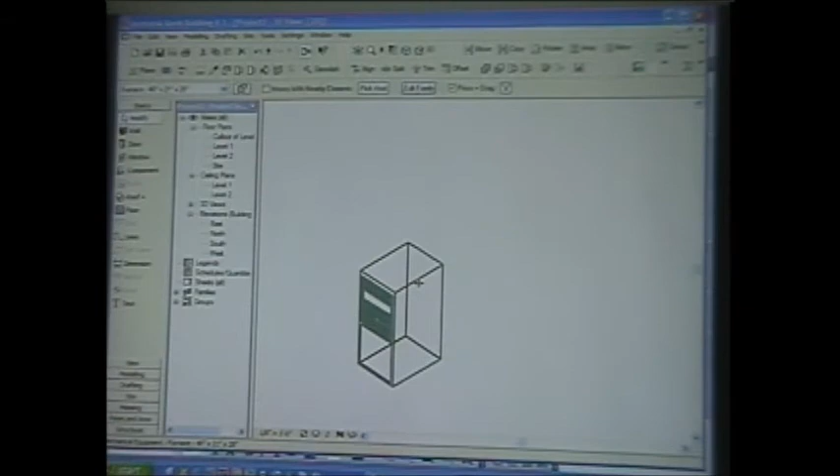Project manages my information. Now, that doesn't work when you're dealing with a parameter that actually has to change something about this. So if I have an output location that needs to move because I've changed the model number, now I'm starting to change a flange off the back of this thing. And I need to move it over physically so that I can coordinate that in the field. That parameter belongs in the family because it's changing something fundamentally about it. So that's my personal belief about the parameters and such. I'm lazy, so I want to avoid making parameters too much. Yeah.

In the project environment? Yeah, right there. Properties. Oh, it's okay. So it's right here. Oh, no, sorry. You mean when I added the parameters? Yeah. Okay, that's under settings, project parameters.

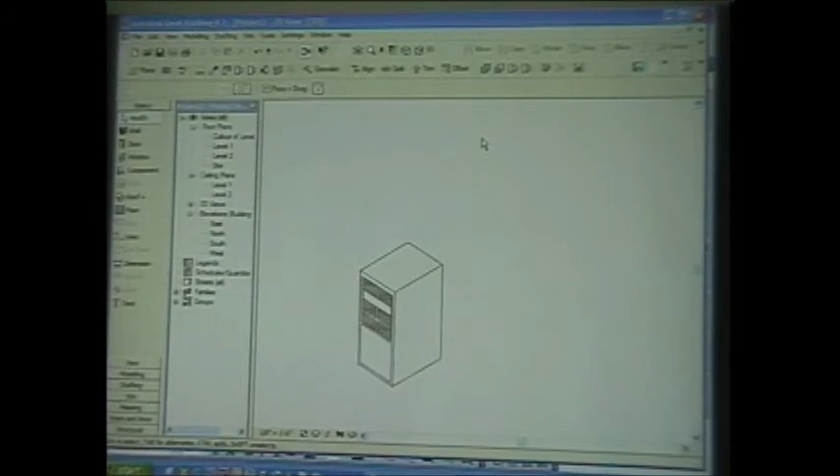I've got a post there, like about the reference planes, for example. It's called Is You Is or Is You Ain't. The Is Reference parameter made me think of the song, Is You Is or Is You Ain't My Baby. And then I've got other ones called What Are Parameters and Why Should I Care? So you can read up on that. It talks about parameters from an overview, and then whether I should put parameters in the family or not. Making a shared parameter, which is a whole other animal. But I've got a wild number of posts just about parameters in general.

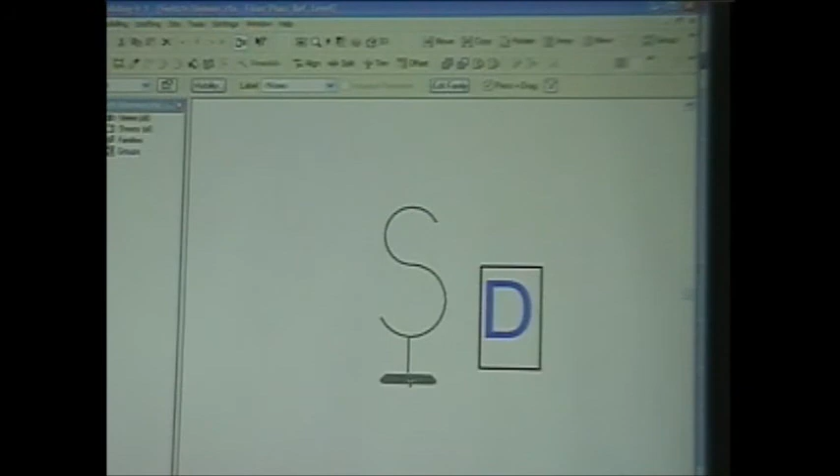Potentially, yeah. The examples of those are the electrical fixtures. The switch dimmer is an example of that. This is a label, and the symbology here, and then there is a box on the wall. But just a word of caution. The examples that they ship with have an intrinsic problem. If I put this on a wall, that dimmer indication on the side is tied to the box. So if in the real world they move the box underneath another switch, now I've got a switch and a D on top of each other.

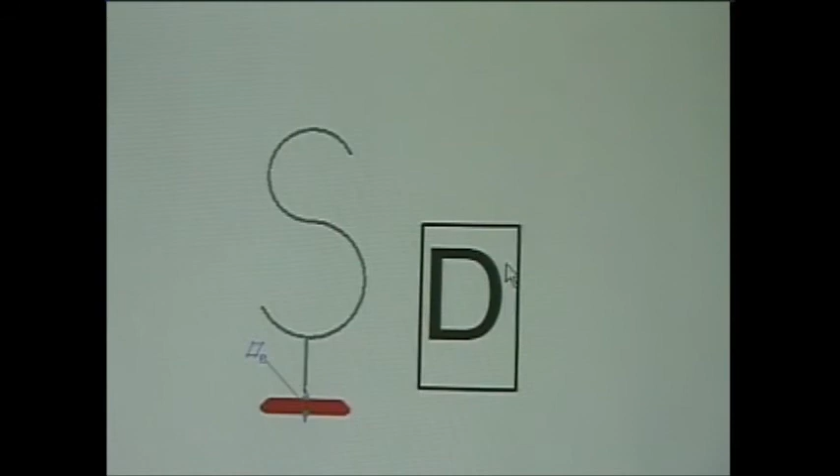So these things need to be built so that the annotation object can be dragged away from where the object is, so that I can model the real condition and see it in elevation, and then move the annotation where it really belongs, because the annotation is really schematic. Are those all 3 separate pieces though? And they're just nested? Yeah, they're nested. This piece here, if I open it, is this. So I've got line work, and then this label object.

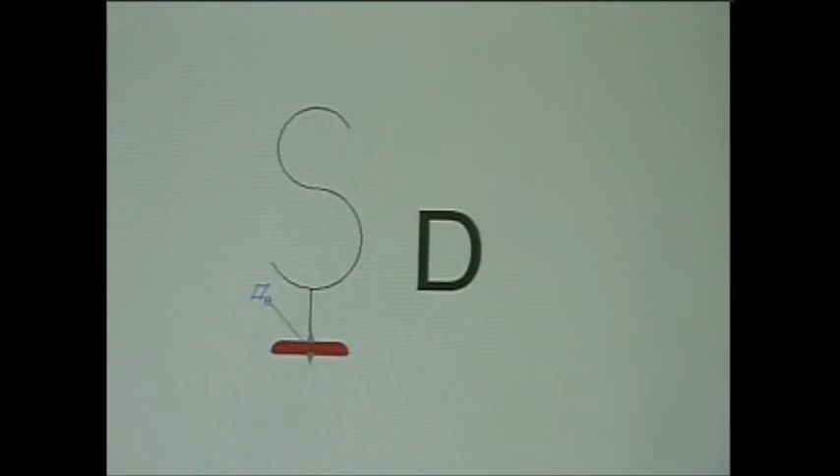And then that is nested inside here in position. And then this is a piece of symbolic line work. Actually, it's a blend, sorry. That's the 3D object that I'm seeing. And the host object has been turned off. So it's actually hosted on a wall.

You could at this point move the nomenclature, the Ds, to a more suitable position here, save it, and problem solved. Yeah, the problem is that works once, maybe twice. If you're really lucky, 3 times. And then the 4th and the 5th and the 6th, now you're back into the family changing its position again.

Could you save it as a family not within the project, but within Revit, so you're always using the corrected version? The simpler, although less obvious solution perhaps, is just to set this object up with its own set of parameters. So the box goes on the wall, and then the annotation itself has another set of reference planes and its own set of dimensions. And if I make them instance dimensions, I can just take that object and drag it to a new spot.

It takes a little extra effort, but it makes the thing much more flexible. And none of the content's built that way yet, so that's one of the things we need to address. Because let's face it, the DS, 3-way, stacked on top, and now it starts to be meaningless. So one would argue that maybe it makes sense to put the boxes where they really belong, and then to give us a clever way to tag them in the plan so that we can just do what we need to do. So maybe they need to revisit it.

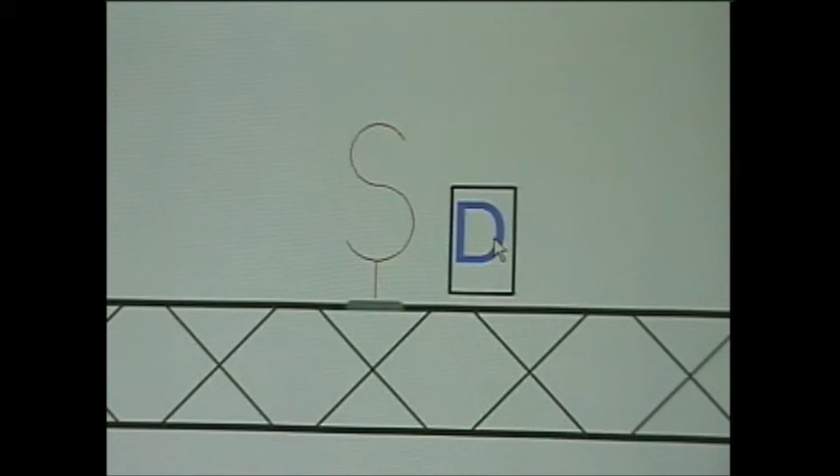So it's the old toilet over the beam problem. It's just an offset flange, right? Or actually, you got to build a podium for the toilet. Any more questions?

Can you have, and I imagine hosting, basically an object that doesn't have host space, not hosting, onto like an object really, as an object, just an object. So you want to host something on another object? Okay, they created a new template in here called face-based, generic face-based. Yeah, I tried that. Okay, the face-based family can be placed on any face essentially. Yeah, I tried using that.

So I did a post on my blog that showed the notion of using a face-based object but with a void, and I put it on the edge of the roof, put it on the top of the roof, put it on the side of the wall, and I put it on another object. The face-based one, when it's cutting stuff, it has to be a host object, so it has to be a wall, roof, or floor or something. But if it's just face-based, it should just be able to land on that face. And the other thing you probably missed was specifying that it's work plane based. So when you go to the settings of a family,

by the way, I'm in a generic model family right now, right? Everybody remember that from the beginning of class 4 hours ago? Okay. It's a generic model. If I go to the settings menu, family categories and parameters, I can actually tell Revit, oh, you're really a door. Or no, I've changed my mind, you're planting now. Okay, so I can technically fake it out.